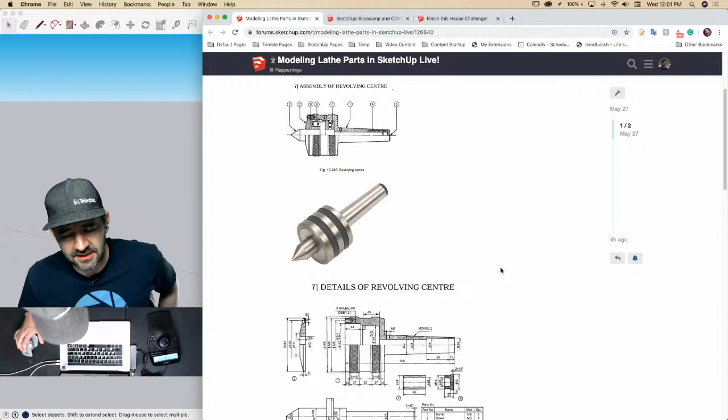As usual, I don't know that we'll have a whole lot that you guys will have to pass to me, but the images I'll be modeling from are available on our forum, forums.sketchup.com. So you can download those files and follow along. If you're watching the video, you can grab them from there. I'll try to make sure that we're linked to it. If you are going to do it live, I'll give you a couple minutes to download.

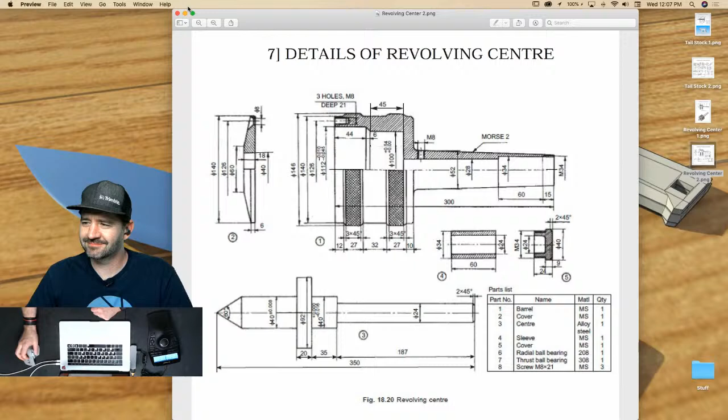This would be the perfect chance for everyone to follow along at home. Follow me as I follow me. Man, this is the best live stream ever.

Okay, so I'm going to go ahead and do that. I'm going to start a new model, and I'm going to do a couple things. I'm going to start by going to my styles, go to my watermark, and import that drawing from my desktop - that would be this guy right here.

And I'm putting the background. I'm going to position it in the lower right corner so we can both see it. I'm going to shrink it down as small as I think I can get and still see the numbers.

All right, so I'm going to do that, that's where I'll start. I'm also going to go up to Window and Model Info. I'm assuming all this is in millimeters, so I'm going to model in meters.

SketchUp is made to do architectural modeling and doesn't necessarily do the best job with sub-inch dimensions. It can maintain those geometries, but it has a hard time creating really tiny geometry. So I'm going to do everything in meters, a thousand times bigger, and then shrink it back down to scale afterwards.

So I'm going to come in here and go to units. I'm going to say decimal, meters, and I probably can get away with 2 decimal places. I'm also going to turn off length snapping.

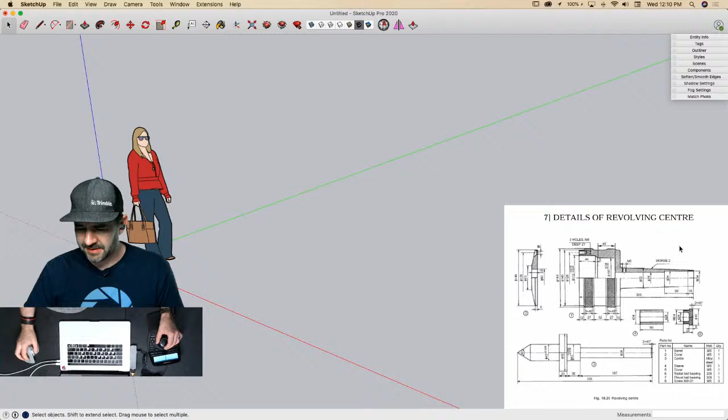So what I think I'm going to do is start with a line that's 300 long. I'm going to come right here, go 300, and that's going to set my initial scale. I'm going to remove Laura, we don't need her right now.

Okay, so if I look at this, this is saying that's the outside dimension. Those are diameters, right? I'm just wondering why this one is cut off and doesn't have that line continue, but it doesn't matter, it's the same.

So I'm going to start up at the top, and it's 112, so I can do 112 divided by 2. And then I can start drawing this geometry over here.

Dash, what's that little dash 0010 stuff? Can you figure it out? I don't know, it's too small, so I don't care. Well, there you go, perfect. Is that a bad attitude? Okay, so I'm going to go that way. It's an attitude for sure.

I'm going to go this way, 44. And then I have teenagers, so yeah, I know what an attitude is.

So down right here, I have a dimension, it's 6. I'm assuming it's 45 degrees. It's not labeled, but I'm going to go ahead and guess that. So I'm going to come down 6, go to the right 6, and just draw a line back connecting the two. That's going to give me my 45 degrees there.

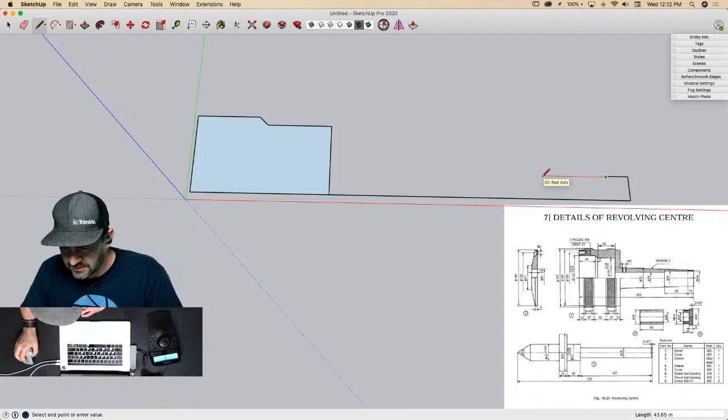That's going to come in 60. And then that's going to drop, let's see, come here, and then I could draw this up 14, half of 28. I did that math in my head, no big deal. And that's the piece that gets taken all the way over here.

All right, so that, like I said, is my cavity, that's the inside geometry. Now let's go hop up here and draw our outside.

So this is a weird one, it's 128 halves. So I'm going to go this way, I'm going to type 128 halves like that to get that dimension. And then I'll come over.

Now I'm using dimensions. What's that? It looks like 126. It may be, I think you're right. Dang it, curses, I have to hit undo.

So not only are you having to do math, but now you're also apparently having to read critically. Well, it's kind of small. So this is maybe here for reference, and I'm actually going to, yeah, so we'll go here. That's why I got a backup. That's what you guys are all here for.

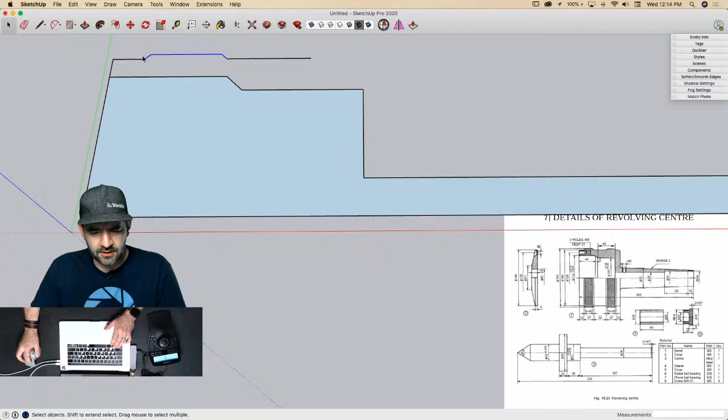Rather than draw that same dimension a second time, I'm just going to grab all of it and move it with the modifier key to copy it over to there. With that, I'm going to go this way, 10.

And now interesting stuff happens because, oh, right there - so it looks like I'm going to draw a line all the way back down like that. And I have this dimension right here, which is 52. So if I go up 52 halves, that puts me right there.

What I believe happens then is this is going to taper down to almost nothing. There's not really details of what happens there at the end, so I'm thinking maybe I'll come up 1 millimeter just to give myself some material there, and then have that angle up to there like that.

So I don't want to lose this middle line. I want to keep that, but I can get rid of this.

What's that M mean down there? The M34 thing. Maybe it means 'Middle,' explaining the middle line. Sure, sure. No, that means you should model in meters. Oh, it's a Morse taper. Dave said - you beat me to it. Of course, duh, what else would it be?

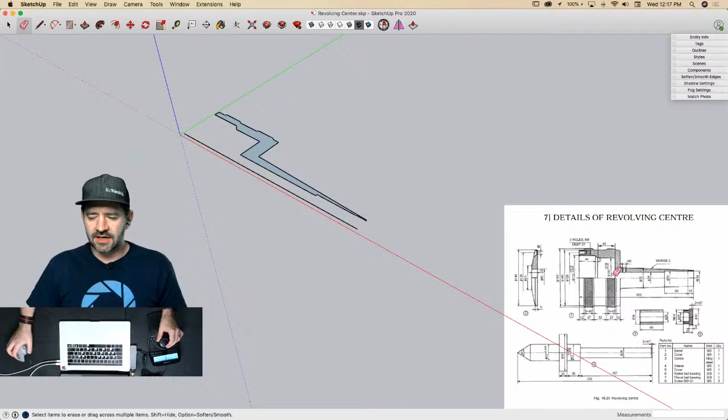All right, let's call this a revolving center. All right, looks good. Now we have to spin this around something. Since this is all the model's going to consist of, we're going to go a little bit higher poly on this. Though we do have knurling, which is going to add some geometry for sure. But rather than use a standard circle of 24, I think I'll jump up to a 48-sided circle.

I'm going to put this circle right at the end, pull it out on the green axis. I'm going to select the circle, follow me with that piece. That gets us the barrel of the revolving center.

So there's more details to add in here - I do want to come in and do some knurling, but right now I'm just going to triple click and make it a component. I'll call it as is shown - it's part 01, which is the barrel.

All right, we don't actually need this or this anymore. I'm going to move that up. Let's see what we should do next - let's do this cap down here.

Dave just offered up some completely useless information here. He said that the taper should be 1.4307 degrees from the center line, to which all I can do is laugh. Not bad to know, but okay. Sometimes you can have too much information. I'm just kidding, Dave, no offense. Please don't take offense.

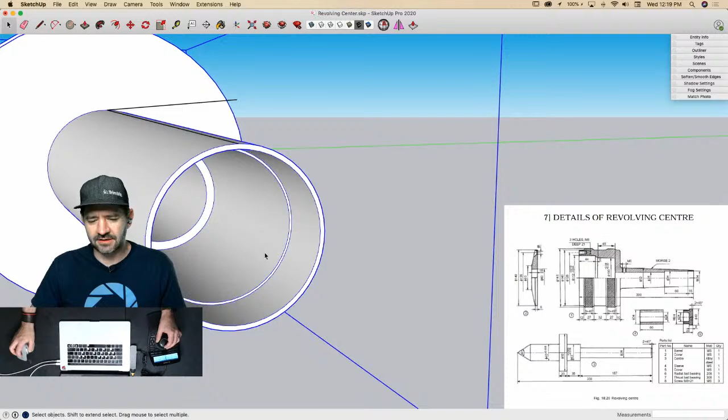All right, let's see what I got, just out of curiosity. Protractor - there we go, every once in a while. Let's see... I got 2.5. Huh. Oh, from the center line - well, that should still be... huh. Well, that's what I got.

Looks good from this side of the camera. That just gets driven into something and friction fit into a holder anyhow, right? Still works, yeah yeah yeah. Details, doing things right, whatever. Okay.

I'm going to draw this little cap right here, so the length of it is 24.

I should point out, yeah, Jody's joking around - Dave does an awesome job, he's a great teacher. I only joke with him because I know him, consider him a friend, and know he won't take offense to us joking about how he's probably right and I'm probably wrong. Everybody else, while you're working your way towards Dave's status, we'll probably be nicer to you. Probably. Oh wow, right? Sure. I thought I was paraphrasing what you said. I thought... you know what?

Actually, now that I'm drawing this, here's the thing. Hold up, so all of a sudden it matters? It might. This is where Dave sits back and goes, okay, keep modeling, we'll talk in a sec.

So that degree number he got, he looked up what a number 2 Morse taper was. Oh, okay, that was just an interesting data point.

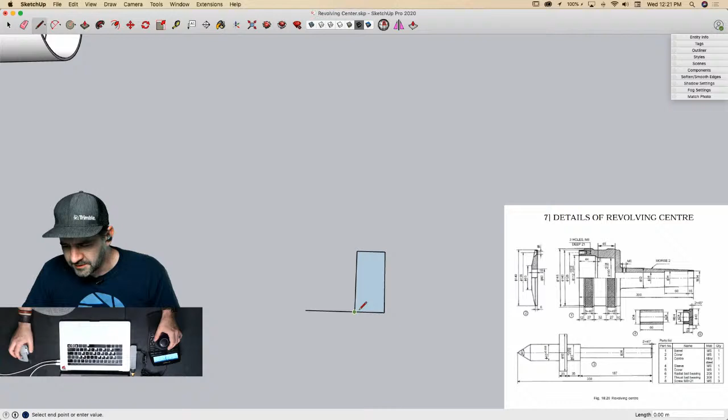Wait, I'm totally wrong though. Andy said he got 2.7 degrees in his drawing. Well, if you're wrong, at least you're wrong together. Misery loves Andy.

Alright, so I'm going to draw this thing over like this. This says it's 34, this was 40 out here. This is 34, and then I'm going to have another one, which is half of 24. I can do that math in my head — not bragging, just saying. That is what that initial geometry looks like.

There is a 2. So here I'm going to draw a line up 2, grab that line, rotate it 45 degrees, and move it.

Dave guesses you changed it to the number 2 Aaron taper. That's right, I scratched out the M's and put A's in there. Forget Morse — who's that? He was always talking in codes anyway, right? Never had him on the stream. What does he know? He never even used SketchUp. Those would be like the most boring live streams ever — just all tapping dot dot dash dash dash dot.

Alright, I'm going to hop on the red axis and pull this out. Axis, damn it — just to get away from the geometry. When I come into circle, it defaults to whatever the last circle I drew was. So I can come here, pull this out. As long as I'm on the green axis, it's going to align with my existing geometry.

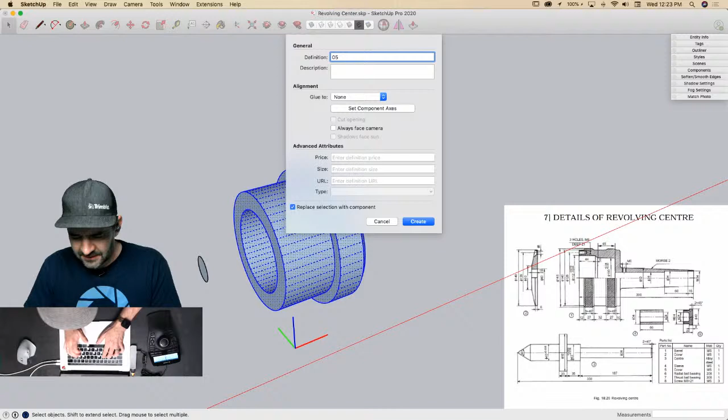Axis — someday, dude. I'm going to grab all that. That's going to be the new drinking game, every time I correct you on axis. This is definitely going to be some trash. This is going to become an interesting show. Although I'm only drinking coffee, so all that means is I'm going to have to pee more and start talking faster. That's true — be able to correct me before I even screw up.

Alright, so I want to take this. I'm going to grab it by the axis — said that one wrong on purpose, since it's no fun to correct me if I'm intentionally making mistakes. I'm going to put it right here. I'm going to grab that, drag it in here like that. See, this is what I was saying now.

If I increase the size, I come in here, grab this circle right here. Oh, it's been exploded. I'm a little confused by this part, because my revolving center for my lathe — a wood lathe — didn't... it's all solid. I'm confused what they've got going on here.

Well, let me show you. I'm going to grab this circle, Option Shift, and pull it up to here. That's going to make it the same size as this. It doesn't have the taper, which maybe is the thing — maybe that should be, but that may get me closer. That looks a lot like a Morse number 2.

Yeah, I mean, I didn't want to pat myself on the back, but that's an impressive Morse taper you've got going on there. Thanks.

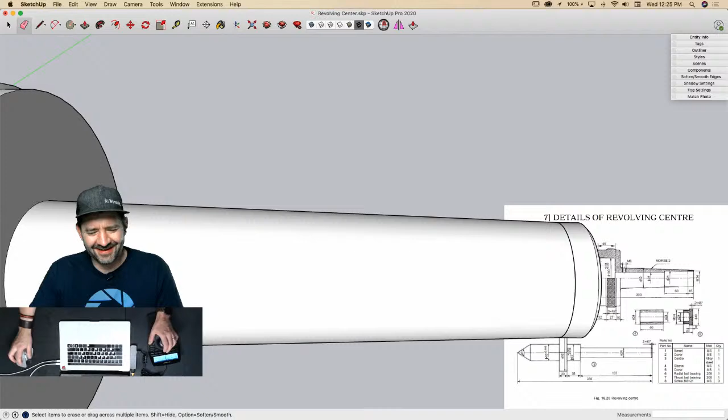Point 9, which is pretty close to 1 point whatever the other thing was. I don't even remember, you know — 1.72, something like that, I don't know, I don't remember. That's impressive. 1.4307 — yeah, that's close to .9.

I mean, it's not — you don't get to use phrases like 'thou,' which means I'm a little less impressed. I want you to be saying, oh yeah, it's accurate to 17 thou or whatever. Nah, I don't talk like that. Just saying, but you could. That's true, I could talk however I want. Well, I got to keep it PG, but other than that.

Alright, I'm going to draw this little sleeve right here. It's pretty simple — 34 diameter, so 34 divided by 2 for my radius. Then I have another circle on the inside, which is 24, so 12. Then get rid of that, then pull the whole thing out 60. That's all the sleeve is, so that one's pretty simple. I'm just going to triple click and make that into a component. The sleeve was part 4.

And then I can put that inside where it goes by grabbing it by that piece right there. I'm going to turn on X-ray, and I'm going to come align it right there. That fits perfectly. All right, 3 pieces down.

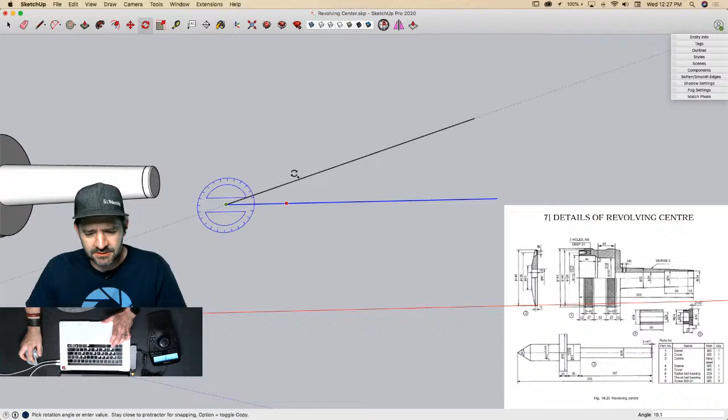So the first piece, the point is actually 60 degrees. So what I'm gonna do is grab this line, rotate a copy of it with Option, and rotate it 30 degrees. Back this way now, we'll start back here. The shaft is 24, so that's 12.

And I'm gonna come this way, 187. Then I'm gonna step up. Again, this is where I'm honest and open and vulnerable with you guys, acknowledging that I am so very, very bad at doing math in my head. But the plus for you guys is my shortcoming means I teach you tricks on how I get away without having to do math. So right here, here's how you can be lazy with your mathing.

So this shaft is 24 overall, and it goes to a larger section, which is 40 overall. Now I could do the math there, but what I would do instead is draw a line, and that gives me that full length without having to go in and figure out that it's 8.

And I'll come across 20, drop it all the way back down also. And then one last one, actually my last one I don't even have to do, because it's the same dimension as this right here. So 40 here is also 40 here. I can just take this line, pull it straight through till it crosses.

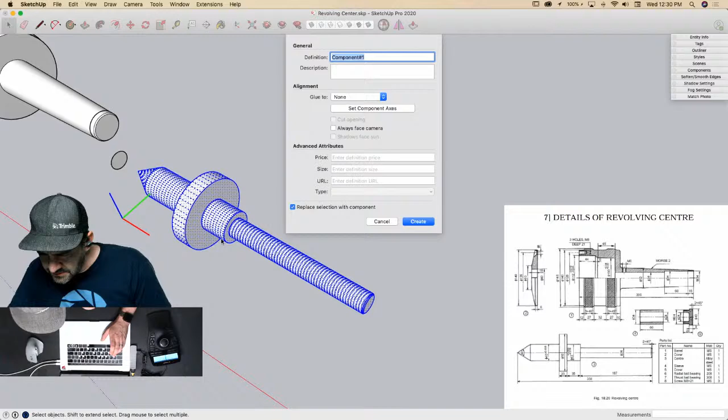Then once again, all we have to do is put another circle at one end, line to the red axes, and move it out so it doesn't connect. Axis, oh man. There we go. Triple click, make component. This is number 3, the center itself.

All right, now we got to get that in here. I'm thinking I'm gonna try grabbing it by the wider piece, because I think that's supposed to line—it's not supposed to line, it's supposed to line up in there. Where's this, what does this line up with? What am I doing? Okay, that didn't work.

So I'm gonna just put it at the top, and now I'm gonna grab it by the horizontal side, and I'm going to move along the blue axes and line it up vertically. There we go. I guess what would have made a lot of sense for all of this would have been to keep it aligned to the origin, because then I can just check as I'm modeling that everything's lining up correctly. I can turn on X-ray and see that laser line going right down the middle.

Every piece is lined up. That's probably what I should have done from the beginning. Lesson learned.

All right, I'm going to save. That's what I do. All right.

Let's get this cap on here. Cap, cover—they have a front cover and a back cover, so I had to change the name there.

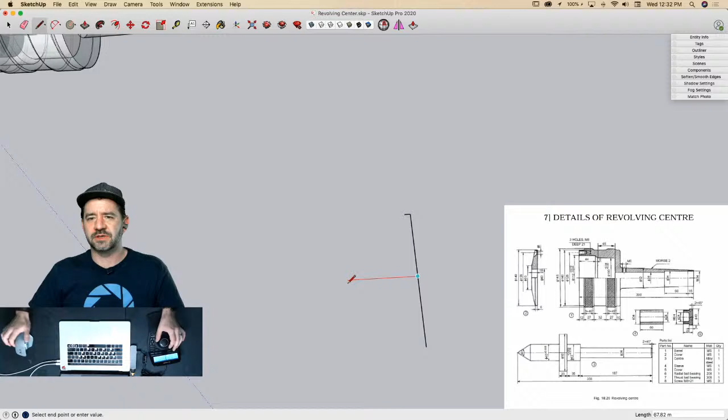Dave's wondering if I'd ever consider modeling those parts in place so you don't have to move them together. That's a great way to do it, and I actually like to model in place a lot, but I find when showing people, it can get to be a lot of lines. I've heard that from people too, like when I model off of reference imagery, I'll have a bunch of planes over each other in X-ray mode and start snapping around, and people don't really understand and get lost. So I like it, but it seems to be clearer for people watching when I don't do it.

That's the reason I'm modeling them off on the side. Plus I get to show off some super sweet relative move stuff. But yeah, if you're comfortable with it, that would be a good way to do it.

So I just finished that off with 2 dimensions. This dimension right here is 18, and then the center to this first break is 60. So I just drew that at 30 and then connected the two together.

It does have a hole in it. I'm assuming the hole is 40, which is what we got here. So to get rid of that, I would just come up 20, go straight across with that. And there we go. I'm holding onto this because this is the center of this whole thing, so I want to keep that, and I can put a circle.

That's where I'll put my circle, on the red axis. Step it out here, axis, along the green axis—I'm saying it spitefully. Okay, grab that.

Make that into a new component. I'm going to call that 02 front cover.

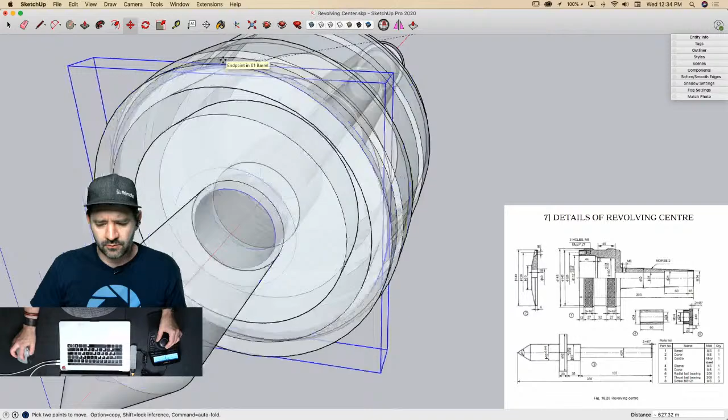Glad that's good. Why am I getting some weirdness here? All right, this is a thing that happens—you guys get this, where stuff's snapping around weird. I like to try X-ray and force it to go where I tell it to go. So now would you say that this video is X-rated? Pretend that didn't happen.

Okay, so that didn't line up. I'm wondering, I really don't even know how this is supposed to line up. Well, your disc looks bigger, your diameter looks bigger for the—that's for the what I'm wondering—piece. All right, so I lined it up to the front of the cone here, and then I'll grab it right here and drag it back. I'm just curious, so as that lines up, it is bigger.

Let's come in here, I'll double click and double check some dimensions. If I go one end to the other, it says it's supposed to be 140 out to out, which it is. So did you shrink the other one when you were messing with the scale earlier? I don't think so—when you scaled the back end? Because it says it's 140. Obviously something's not right, let's see.

Let's go here. Oh, you monster. 128.

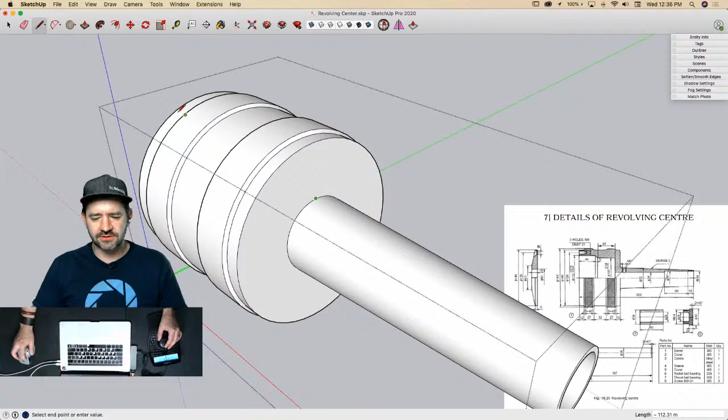Here's what I'm going to do. So what I want to do is grow this outer piece. I don't want to mess with scale on a circle, especially with this much connected geometry—stuff's going to get distorted. What I want to really keep is this profile here, these lines right here. So I'm going to drop, and then drop straight down. And then I take this surface, intersect face with model.

All right, it didn't give me that. Select all of the intersect face with selection. There we go, that's the line I want. Everything else at this point I can actually get rid of.

Oh no, I should do the same thing. No, because the insides—well, let me check my inside dimensions real quick. I know my outside dimensions are wrong. Let me check this real quick. Andy said 128 is the inner diameter. So 122... 112 is this... oh, 126 is to where the screw hole is. So that's the screw, 126 hole. Andy fell for the 128 thing too.

All right, so I'm going to get rid of this—simple mistake, I'm going to get rid of it. Got a screenshot of this. And then I'm going to get rid of the... oh dear, golly.

Gosh darn it. Wow, that's real nice work, Dave. All right, there we go. Nice, so that's what I want.

Ew, man, I tab away for one second and what's going on over here? Nothing, I'm triple clicking these lines and then deleting them. Jeez.

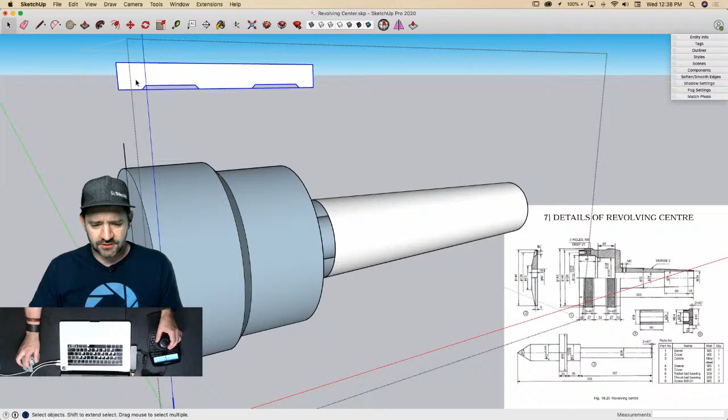So what I'm going to do, again, I'm trying to make sure I keep this as correct as possible. I'm going to take this - I don't think it's a circle, it's not a circle. I'm going to weld this real quick, and grab it and say follow me with this shape. Oops, follow me with this shape. What? Oh, it's grouped. I can explode that now. And group, grab this, follow me with this. Now I made that inverted.

But it still is going to work. So I'm going to grab all this now, reverse the face.

There we go. This doesn't feel educational anymore to me. I'm sorry, it's like I had to figure out how to get out of that pit of self-loathing, not sure what this feels like.

All right, so yeah, that's what I could have gone through to fix it. Honestly, being that it took maybe 10 minutes to do that whole barrel, it probably would have made more sense to just go through and redraw it. I was excited about the opportunity of taking that outside piece and moving it up, but having done it, that was something. That was something.

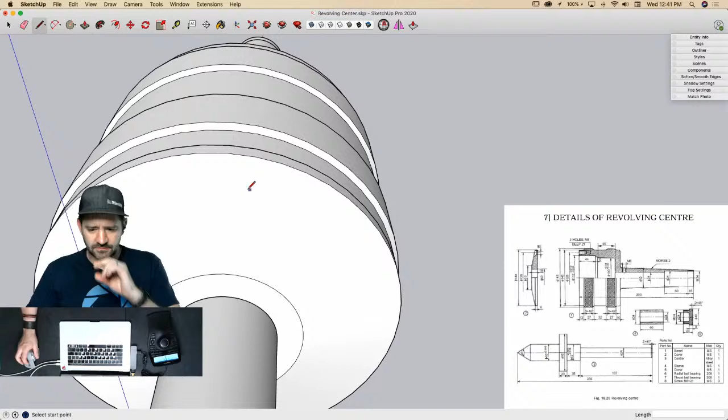So here's what I'm going to do, here's what I'm thinking. I'm going to hide this piece. I want to use solid tools to do this. I'm going to draw this circle on the top - this is going to repeat 3 times. So I'm going to come in here, put a circle right at the middle point, and bring it up 4. That's going to give me a circle that is 8.

I'm going to take that and push it in. This goes in, it says 21 deep. So I'm going to pull it this way, 21, turn on my x-ray - that's what that looks like. I'm also going to push-pull that out this way, kind of indiscriminately long. I just want it to come out a long ways.

Now I'm going to go to my outliner and turn my front cover back on. Now what I want to do - see here I have like kind of a flare, so I have a countersink there. What I'm going to do is push this back in, so I go into the geometry.

Don't have specifics. Christoph said here you did 12, not 21. I got the numbers right, yeah, just in the wrong order. Well, how specific are we going to get with this machine?

Jeez, it's not like he's going to be spinning at a high rate of speed, metal flying after if you do something wrong. I will take that and extend it 9 longer. Everybody happy? Sorry, did you just math the difference between 12 and 21 just like that? Yeah, when I get angry, I get good at math. All right.

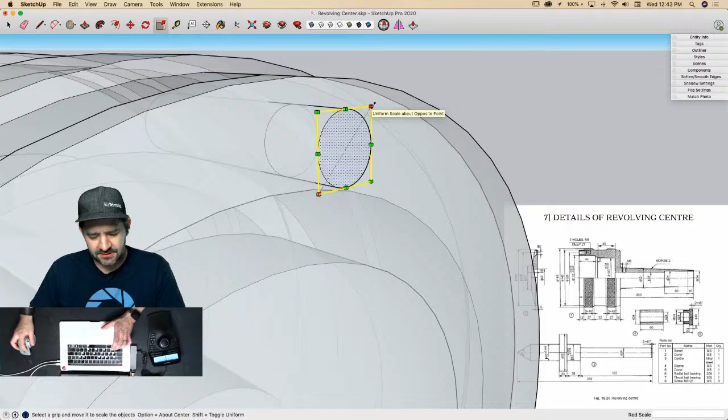I get up to 17 thou. Sorry, I'll shut up. I'm going to scale that off of the center. Option, no, I'm going to grab a corner, excuse me. Option to pull it in the center. Pull that in big like that. That's going to give me kind of my countersink there.

Let's take a look at that. How's that going to intersect? So I can push that back in a little bit more. That's going to actually broaden the cone like that because I'm only pushing the face in. So as that big circle gets closer to the small circle, it's going to push the cone out.

When I'm done, I'm going to triple click this and make it into a group. I'm going to take that group and rotate it around the center pin. I'll start straight up, option, and bring it—these are just numbers I know. There are 3 of them, so I'm going to go 120 degrees, 2x. That's going to give me those 3 pieces.

Now, what I can do is at each one of these, I can come grab this pin. Let's save. I'm going to go to Tool Palettes and turn on Solid Tools, and I'm going to say trim. Oops, it's not solid for some reason.

Hold on, let's check Solid Inspector real quick. Oh, I think I left an internal face in each of these. Oh no, all fixed, good. I left an internal face in those where I pulled the second piece out to create the cap. Let's see if this looks good in X-ray, we'll see.

I'm going to take this piece and trim, not subtract, from this piece. That's going to be that first cut. Now I don't really care about this piece, this isn't the actual screw, it's just representative. So on the second piece, rather than trimming, I'll select it and subtract from the barrel. And when I'm done, I get that.

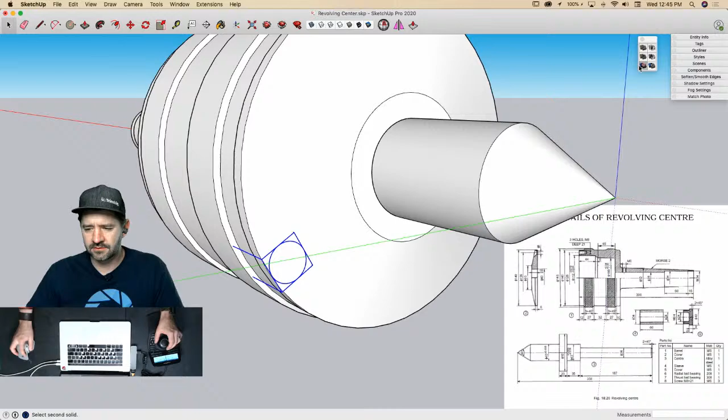Look at that. If only it was that easy to do in real life—basically, why don't you just do it, machinist? All right, trim from the cap, then subtract from the barrel. Trim from the cap, subtract from the barrel. Boom, those pieces are done.

That was pretty good. Let's talk about knurling. So knurling is—it's basically a term for making your model extremely heavy in very little time. That's what it actually means. What can I do to bog your computer down? I know, crisscross patterns.

So obviously the idea behind knurling is getting what's otherwise a smooth piece of metal some tooth, so it's easy to manipulate by hand.

So what we're going to do is come in here. I'm going to take one piece, this piece right here. I don't want to go in and draw a whole bunch of knurling, of course—I want to save my efforts wherever possible. My thought is to come in and just knurl up this little piece and then copy it around. So I'm going to try to do that.

I think what I'll do—I haven't done this a whole lot before. Let's see if we notice. Yeah, so I'm going to go to the midpoint like this. I'll do the same thing coming this way. I'm just trying to decide how much knurl I want to add here. I'm just going midpoint to midpoint, right? Midpoint to midpoint.

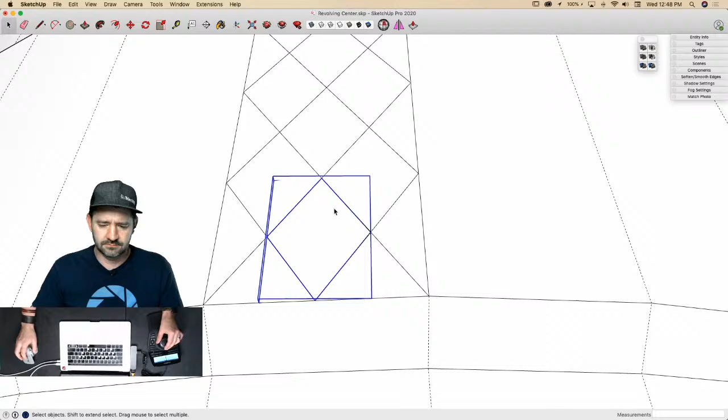You know what I would love to see? It's not possible, but if you could just grab all the lines and push them down, and SketchUp would auto-fold every one of those into a nice, useful knurl. Alas. All right, I'm gonna grab—I'm putting a little too much on the auto fold functionality. Yeah, that's asking a lot right there.

But that's probably a SketchUp extension opportunity. Yeah, somebody out there looking at you, developers.

All right, so I'm going to realign my axes so it's at the face. One of the problems I have right now is, because I took my circle along the green axes when I pulled it out, that means I don't have a surface that's flat to my world at that point. So by realigning the axes right here, it's going to make it easy to grab the axis center point and pull it straight up on the blue. All right, so there is a single knurl.

I'm going to grab that. So Interoth said right-click, align axes. And also, that would work.

Knurling isn't those bits getting raised up, it's the lines getting pushed down. It's a removal. I mean, we basically just made this thing a larger diameter than the drawing said.

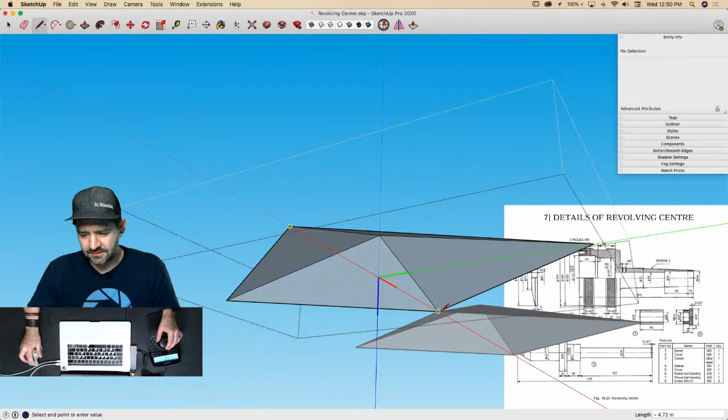You know, I could - I don't even need an excuse, I can just do that. I don't care. I'm going to chop off half my knurl here. It's only a partial knurl now. Semi-knurl, that's right. Take this.

Copy them over here. Because what I could do so good right now is looking pretty sweet. The issue that comes up right now is this. So if I take - but I liked your thinking.

So I think I'm going to make - I've just challenged my own idea of what knurling even is. Oh, Mark had a good idea.

You could just take all this and flip it over. Thanks, Mark, thanks for totally ruining - oh, did he steal your thunder? No, totally kidding, Mark, that's exactly where it's going.

That's great, good thinking. I'm going to take all these pieces and group them together. Whoops, I grabbed too much. I have taken too much.

All right, so I'm going to do a group select like that. I'm going to right click and use Select Only, which is part of Selection Toys by ThomThom, and say select only components. That's going to deselect everything that's not one of these highlighted components. Then I'm going to make those into a group.

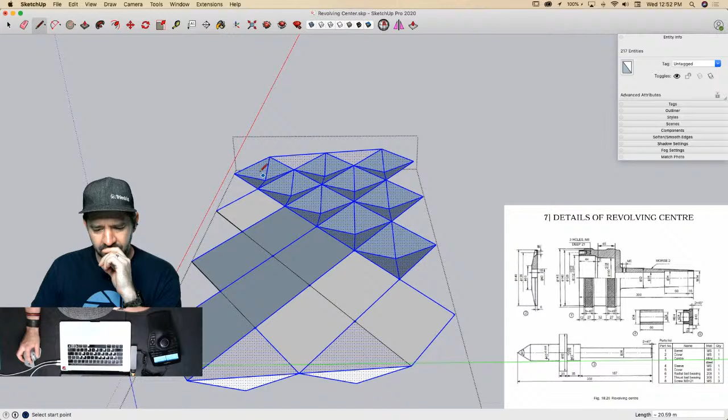Will it consider this all solid? I don't know. I mean, it goes down to zero thickness at every one of the intersections there, right? Let's see, if I grab this.

Also, that first one's not closing right. You've got thick lines in the middle of your... I think if I do this, yeah, it's going to delete it all. Okay. That's okay, it's not a big deal.

I was just wondering if I could use solid tools. I don't think I can. Yeah, this is going to be an issue because exactly what Jody was just saying - all of my sides are coincident with other edges, so I don't have a spot where it's real simple interior or exterior. Everything overlaps.

So what I think I'm going to do - the only reason this isn't as straightforward and simple is the way that this piece meets with this piece, right? Because that's not going to be simple at all. Here's what I'm going to do.

I know at this point we've gotten kind of - what are we doing right now? We're doing like a mental exercise. Or thought experiment. Thought experiment. There we go, that's the words I was looking for.

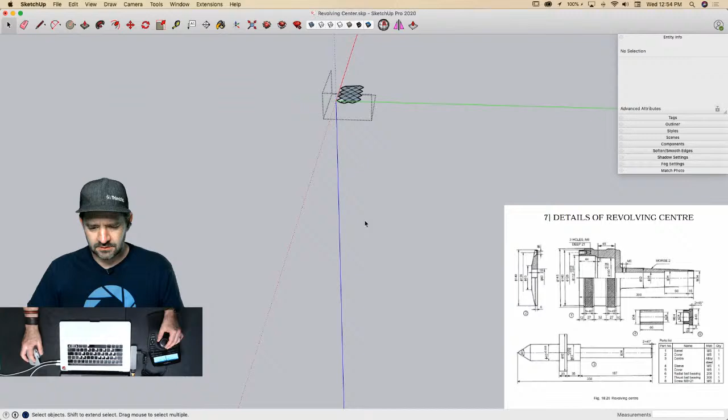So if I grab all this, I'm putting it in a group just for one reason only. Oops. And that is so I can come in here and not see all that other stuff.

All right, so I'm going to get rid of these lines I used to create my diamonds. All right, so now I have just that solid piece.

All right, so now I have this piece, which is my downward facing diamonds, and I have this piece. So I have these two groups. I'm going to group them together again, so I can come in here, simplify my drawing, and see everything else. Now what I'm going to do is take both of these and explode them.

Now if I come in here and start deleting stuff, like these faces here, that's most of it. Right here, because of the angle, each wedge is going to be at a different angle, so each piece is actually cut a little bit short to make those pieces come in together.

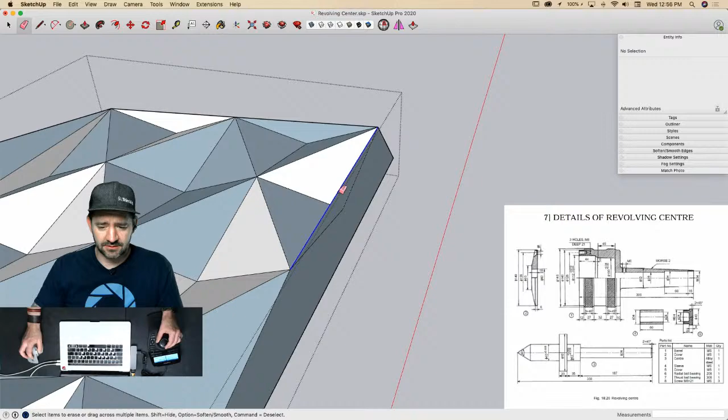So that's how I respond to Jody's challenge, basically, I guess, is what just happened. Nice, I feel like you just slapped me across the face with a glove, with a gauntlet. Was it a glove full of knowledge? It was, in fact. That's actually the term knurling, a Swedish term that means slapped with a glove full of knowledge. So some people don't know that. The Germans and the Swedes, they really mapped it all out for us.

They had it figured. All right, this is almost there, almost but not quite. The issue I have right now, of course, is this. The knurl just kind of reverse faces. Oh yeah, I should probably orient faces too. Do that, please. I got an issue, wait a minute.

That is an anti-knurl. Yeah, but it's okay, we made an anti-knurl. So I'm going to take these two faces. No, I'll do one at a time. Take this face right here, rotate it 180 degrees.

Oh, what happened there? Oh, because I'm not flat. So I'm going to take Ennerot's idea, take this and say align axes to this face. Then I can take axis... wait, axes? I aligned all the axes. Yeah, multiples. So I said that right for the first time.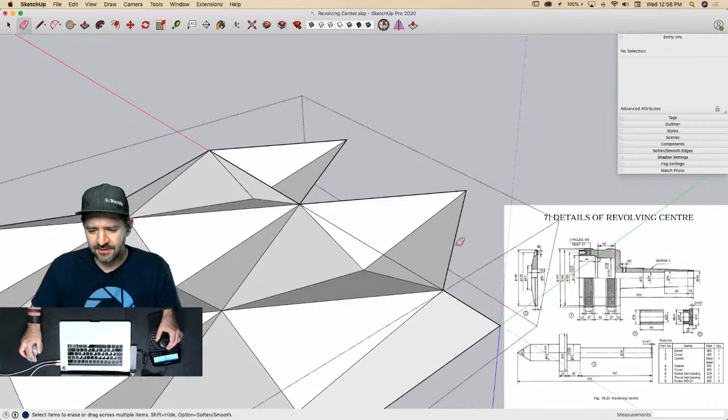I'm going to grab those two also and flip them around 180 degrees, and then one last group select, intersect faces with selection. That cuts it all, everything's cut for my anti-knurl. And come in here, get rid of these pieces on the end, this piece, see it coming in there. So if we wanted a true knurl cutting down, we could have designed the opposite of a regular knurl. It still works, it's still good.

We're good. All right, I'm going to double click this line right here, or this face right here, and hit delete. That's going to open the whole thing up. I'll just get prepped right here and do the same thing, delete there. Then I can take, what is this line doing? Get lost, pal.

Google cannot provide an antonym for the word knurl for me to use in this scenario. And I'm sad. What's knurl spelled backwards? That's what I would do. Oh yeah, there you go.

Actually, before I copy this over, I'm going to get rid of this geometry on the sides because I don't actually want that piece underneath there. So I'm going to come back in here. Awesome, I'm going to grab both of these now.

I'm going to rotate, unhide everything so I can use that tip to rotate by. I'm going to rotate it, not a specific amount of degrees, but from one point, option to the next, and then tell it to do that 47 times, which will take that all the way around. Do it a bunch of times.

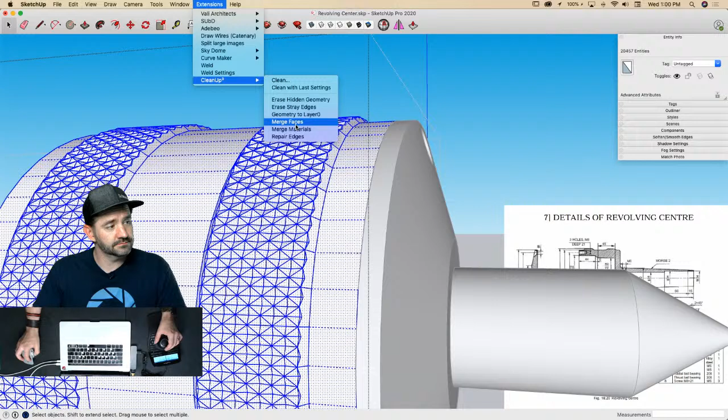The last thing I'm going to do is grab all of it, and rather than manually deleting this, I'm just going to go to my extensions and use cleanup to merge faces. Wait, let's get a polygon count. Oh yeah, there's a couple. I should have looked at it beforehand, but yeah, there's... I know, that's what I meant to do. Undo, control Z, control Z.

That's a heavy little piece. That's not terrible, but it's not little. I've seen worse, I've made worse. Yes, you. I mean, really? Oh yeah, there we go.

So there's our anti-knurled. That's got to be a thing, right? I've seen that pattern as a knurling. I think you can do it. I think it really depends on the bit you're using for making your knurl, so I think it can go both ways.

When Dave did it, I'd be interested to see. I'm sure Dave will post his on the forum. He doesn't like to one up me. He likes to let me do mine, and then he goes, 'Oh, that's cute, let me show you something.' Well, he did post a screenshot, but you can't really see his knurling in it. That's because his knurling is fine, super fine knurls. See how it looks? It's just like a gray field there, because he's got super fine knurls. Andy's posted a screenshot of his stuff too, but he's been a little quiet here. I think he's off sneaking around trying to make his own knurling right now. Well, that's because his only comment is, 'I did all the dimensions correctly.'

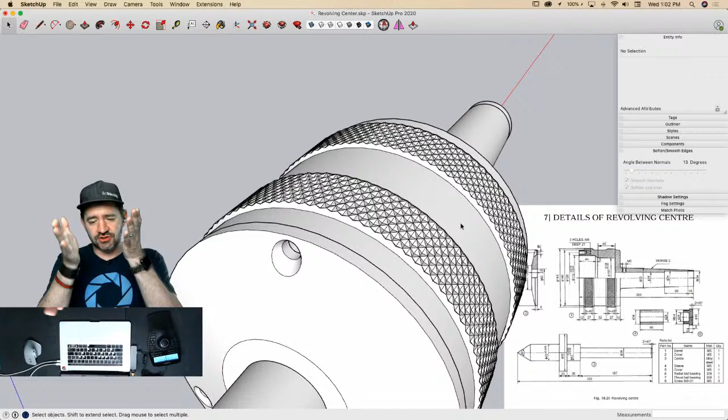So Brian's questioning the 47 you used to make it work out. That's because you had one already on there, and then you need 47 more. Right, for your 48, I wanted 47 copies in total. So my circle is 48 sides, so the chunk I made was 1/48. Making one copy, I'm saying I want a total of 47 copies. That's what's 47x. If I had done 48x, it would have put another copy over the original, and I would have had extra.

Awesome, well I'm going to save that. That looks nice. And yeah, that's done. All right, let's move along to a much bigger- oh no, nah, I'm not going to mess with it. Save, done, found it. Stick a fork in it. All right, or stick an M8 screw. Is that M as in Morse? Yeah, I know about that.

All right, I'm going to come get my reference imaging. Actually, I think for this I'm going to snip out smaller images because there's a lot more to this one than there was. So this is the tailstock, this is what we're actually shooting for right here. There's lots of pieces. The big piece, of course, is going to be the body, so I'll start with that and get that modeled up. And then the rest of these pieces actually kind of look like a lot of primitive shapes, so that won't be too difficult. The tailstock, though, you'll see when we look at the two different dimensions - this image, by the way, I don't know what this is, SolidWorks or something, is not actually what we have plans for. This place I'm getting these drawings from, the picture you see doesn't always line up with the dimensions. Yeah, this is what we're actually going to build off of. Oh my gosh, yeah, there's so much data. I'm going to start with just this piece right here, because this is the part that I really want to model first.

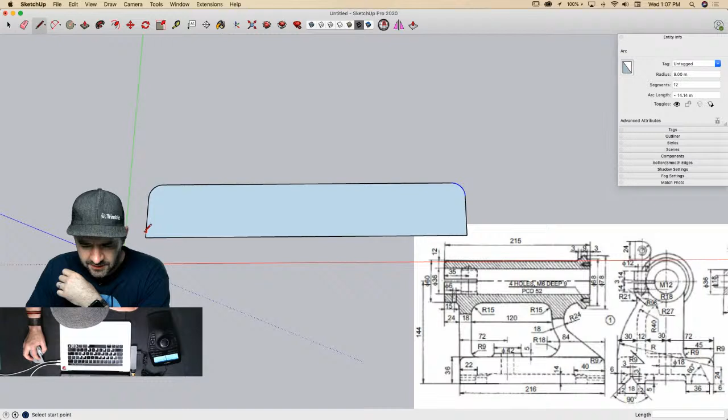So I'll draw a line from the bottom here, draw it up 144. That's the center of the barrel here. And then this part right here is 60, so I'm actually going to draw this over 24, then come down 30.

And then there, so that's that. And then I could come up here another 30 and draw that back this way, 215.

Drop that down 60. So that's the barrel, I'm not really too concerned about that. That'll of course be a round extrusion that we'll tack on later, so I'm not too worried about it. I do want to get the base geometry mapped out first.

Because I think what's going to end up happening is I'm going to have a chunk that is that cast base piece that I will intersect and union with the circle piece. I think something like that will happen, but we'll see. This is just a placeholder for right now.

All right, so this is here, and then it looks like this is 18. I'm not doing my circles or anything like that yet, that's just this right here. Then I go this way 120.

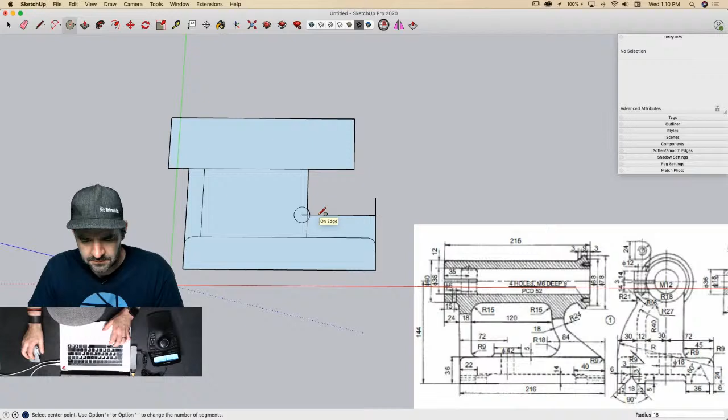And I can take that circle, and looks like I can drop that straight down here. Yikes. Like that. And that gives me this right here.

Comes to there, and then I got a radius of 24, 18. We can do this. I'm not worried, I'm not scared. We got this. All right.

Over here, I'm going to draw a circle, 24 for the radius. I'm going to take that.

Really quiet in chat, I think you might have intimidated everyone. Oh come on, guys, I have no idea what I'm doing. If you leave me, I'm really screwed.

All right, I'm going to take this. Now, this is 18, so I'm going to take this circle right here. I'm going to offset it. Oops. 18.

And then this should... this is going to get messy up here, but I'll fix it. What should happen now is this piece should kiss that piece.

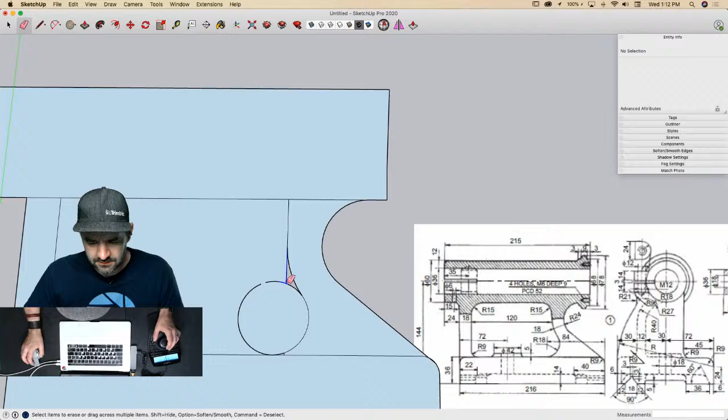I mean, it's not like I have self-doubt, but a lot of people are watching right now. It makes me self-conscious. Whoops. Then I do silly stuff like that. See, I can't even say silly, I said stilly.

All right. Not too bad, that's not a bad lineup.

Kind of looks like a sewing machine. Maybe that's what we should do next week. Let's get through this week, okay? So...

All right, so I'm going to put some more arcs in here. I'm doing these arbitrarily, I just want to get tangent arcs there. Oops, there. And there, and then I can go back and select them and bump that.

This one is 15. This one also 15, looks pretty good. And this one down here would be 9. All right, 9.

Which, of course, is the German word for no. All right.

Right about now, I'm wishing that I ate before this started. I'm going to make that topical and all about you. It is all about me.

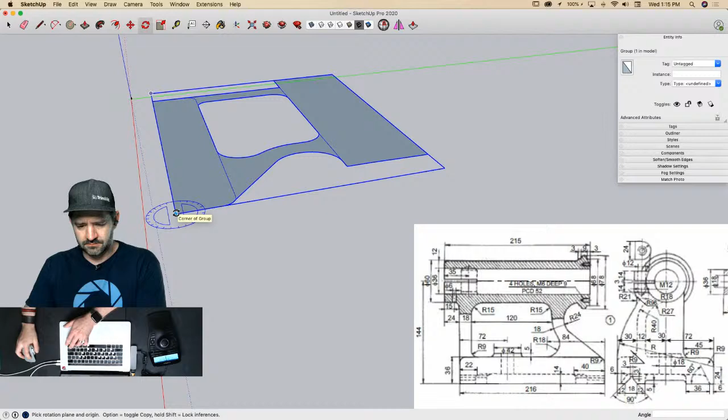So it looks like, let's take this one. We'll rotate this vertical because it is. I think what I'll do is start by separating that from this, make this a separate piece. So if I start this way and come this way, 72, and then come this way, another 72. All right, so one thing is I've got this all rounded by 9 all the way around.

Oop. Get rid of this.

So I need to take that same round off the other side. I'm going to put an arc right here, put the same one over here, and then I can just select it, change it to 9. Same thing over here, grab this one, which I was really close, look at that. Okay, excited for myself. All right, I'm gonna grab this.

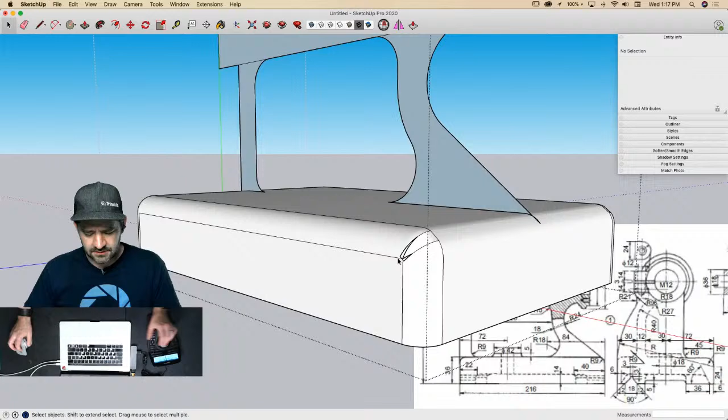And I will, some got ugly. That's neat. Oh, this is, yeah, okay. I gotta undo a couple times, because this, for whatever reason—oh, that's what happened. Look, when I pulled, yeah, that was not well done.

You were all getting cocky. I was. It's probably a lesson about humility. I don't know, something like that.

All right, so I'm gonna grab that line. I should have actually put it here. And then continue that along like that. Now if I come out here and pull this out, that's why that one face was white while everything else was gray—because I didn't do that correctly. All right, now I can get rid of, hey, I'm just showing some what-not-to-do's here.

You were really good at showing people what not to do. Apparently I really would like to be better at showing them how to do it right in the first place, but I'm a work in progress. All right, aren't we all?

There we go, follow me. See, does that look better? Nice, better, but not. Nope. What? What are you doing? That should be fine. Why are you being like that?

I don't know, did the first curve just great. Yeah, it's the same curve. Same curve. Take that. Ah, what the crap? Is that happening over here?

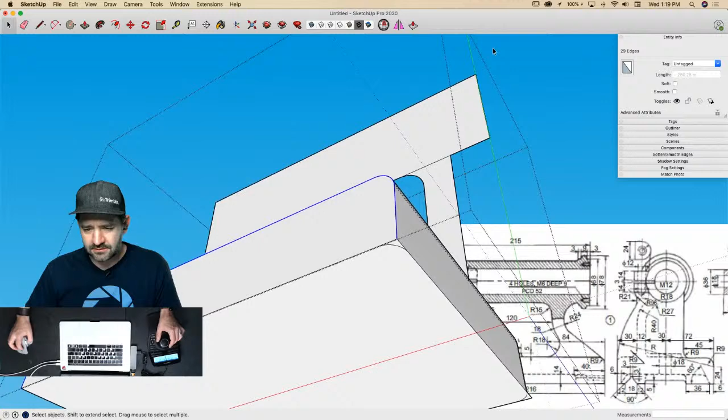Monsters, okay. Nerman said split and mirror. I mean, you know, why make it 2 times and risk screwing it up when you can make it 1 time and then remove that chance?

Okay, so I did something wrong on the other side. Obviously, the way I broke this is... before you chomped this thing with the follow me, it looks like there was kind of a little hump in that curve, but it looks fine now, so I don't know. I pulled the same exact profile, so the only thing I can think of is this curve.

You're off by 2 thou. Oh man, so glad we got in that term. Actually, I don't even know how many thou off you are. I don't know, that's math.

Oh, but that still is causing a problem. I thought I had my circles, I thought my arc up there was at 9 also, but apparently I'm just not. Okay, anyhow, doesn't matter. Not going to investigate it, just going to clean it up and keep modeling.

Which is one of those things that, like I said before, I'm working on. Just draw the stupid thing, stop figuring out what you did wrong. We all know you did it wrong. Got that part covered, the wrongness is covered.

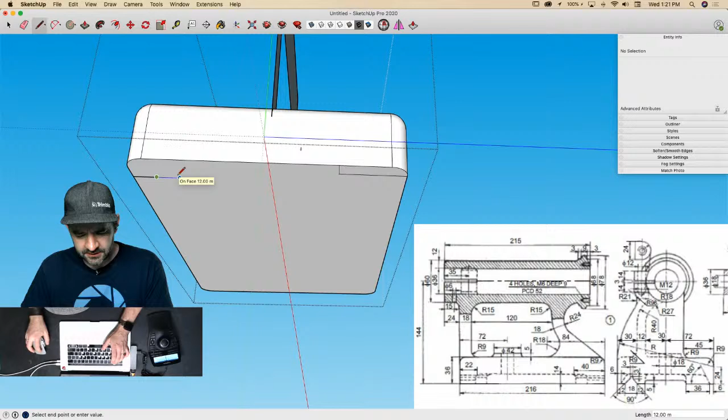There we go. All right, let me open up the super zoomed in version. Oh God, no, I don't want to look at this. There's too many numbers here.

All right, so I'm going to bring a line. This is up 5, so I'm going to come over 5 and draw an arc from here to here. And then same thing here, just draw a line over 5. Arc... arc from here to here. There is some other detail on the bottom there, but I'm not going to do that right this second.

All right, so let's get into this thing. I feel like what's going on here... it's kind of hard to see exactly what's happening, but we'll start at the very least with this full profile. We'll create this whole thing right here onto this right here.

So if I was to bring this all the way over, probably once again I could have saved myself a little bit of pain by doing this before I rounded my corners off. Well, that wouldn't hurt.

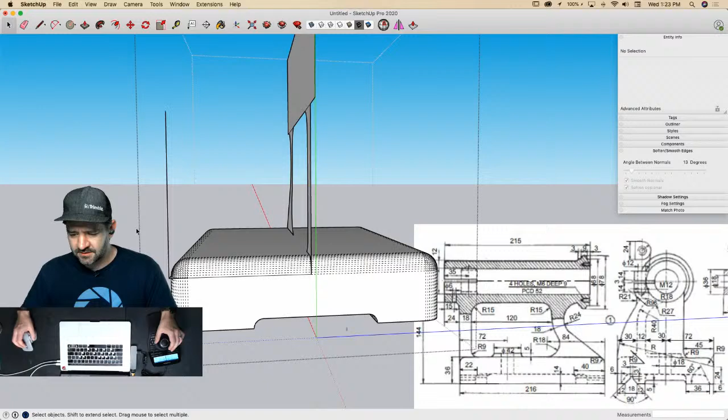All right, so I'm just going to draw a vertical reference line that jumps the corner there. The nice thing is I always do these in the wrong order, so seeing someone else do it is self-affirming - I feel a little better about myself, and it's nice to see other people's workarounds. Hey, just think if you used guides. I mean, that'd be kind of... let's not get silly. All right.

So there's this term that I like, it's called designer's choice. It's what happens when the dimension's not there and I get to do whatever I want. Not saying that's where we're at yet, but we may get there. You're in a very lucky position right now. Yeah, I'm lucky.

All right, so I'm going to draw a 2D, just kind of a... there we go. That's that knocked off corner if it were still there. That way I can draw in plane right here.

So I wonder if I'm alone in every time I hear someone say 2D, I always think of the Facts of Life. Wait, Facts of Life? Yeah, Facts of Life. Tootie? Yeah, shame of a name to have for a kid, I'll tell you that. I have to hope that was a nickname. Wonder how she got that nickname.

Hmm, all right, I'm going to pull that down. That's the 45, so that's this line right here. That's the one line I am now 100% sure is perfect. Maybe, we'll see what happens. This is still the center right here.

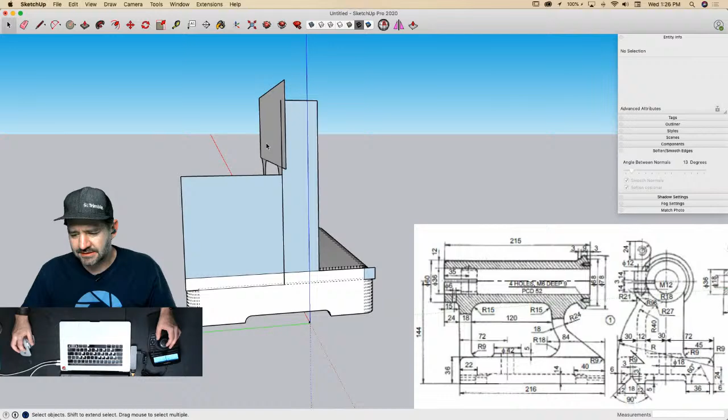Oh, actually, nope, I do have it. Never mind, I lied, check this out. All right, so this line right here - if I come up 24, that's where it is. So if I just draw a line up 24, and I'm going to leave a line right here for reference.

Andy pointed out that you could always trace over the drawing, scale it up, and trace it and figure it out that way. Or I could grab an arc, come this way, and go from here... we'll just run it all the way through. Oh yeah, yeah, because they have that dimension there, and then they just have that arc. So that goes up like that.

That was something. I mean, I have to figure they probably, realistically, what I would expect from this part is that it was machined one time, and then a mold was made, and it was drop forged forevermore after that. Something like that makes a lot of sense. Or cast. Because I would not want to have to try and do that arc every time I made one of these if I was the guy at the manufacturing plant.

I think that when you see parts like this, like the pieces on a lathe, I'm pretty sure they're almost always cast. Like it's not a chunk of material that's hand cut each time or anything like that. So I think that's a valid thought. All right, so that gave me this.

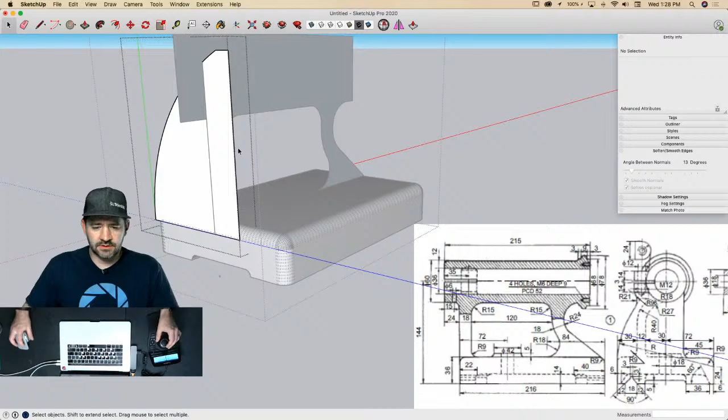So I'm going to go ahead and group that. If I come into that group, I could pull that through to here. If I come into this group, we pull that through to here, along with that. Pull this side out to where it meets this side. Pull this to where it meets this side.

Okay, I'm going to make those separate pieces real quick. Group that. Get rid of X-ray, get rid of my extra lines.

I will have, I guess we got a finishing point then, huh? We have defined what finished is. Nice. Yeah, there you go. That's an hour from now.

All right, so I'm going to clean this up as much as possible because as I intersect, I want as few lines as possible. I don't know if this is going to work. We're doing weird stuff right now.

All right, so I'm going to explode those two out. So what I've created is 3 profiles, 1, 2, 3. And now we're going to just start colliding them together. This is one of my favorite operations to do in SketchUp, I'll be honest.

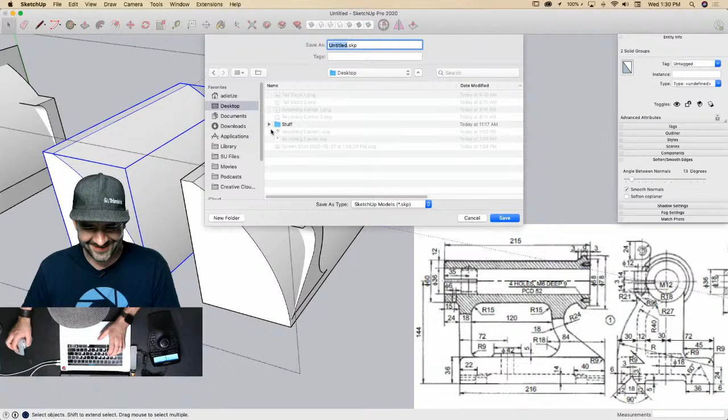Can't, whose job was that? How did we get to this point without a single save? Oh, because we were talking about different languages and there's all kinds of stuff happening there.

Okay, so what I'm going to do now is check for solid, make sure we're solid, solid, solid. Okay, as a rock. Like a rock. All right, I'm going to go to my tool palettes, turn on my solid tools.

And now we will say, give me the different intersect. I can never remember the names of these two. Boom. Oh, look at that.

Let's try it again, see if lightning strikes twice. I mean, lightning does strike twice. It's about whether it does in the same place. Yeah. Yeah.

All right, and now, oops, you know what? I'm going to leave that there because I want to use it as a reference to pull this back over, and then pull this.

Dave came back and said that they would do a sand cast when they were making one of these things before they molded it. They usually would do it out of wood. And it occurs to me you could also very easily just make these pieces and glue them together before you cast them.

If you're trying to make one of these at home, anybody trying to make one of these at home, just remember that. Just call Jody. He apparently has it all worked out. Well, I'm extrapolating my thoughts from Dave's working it out. Dave's got it worked. Call Dave. Dave's got it, don't even worry about it.

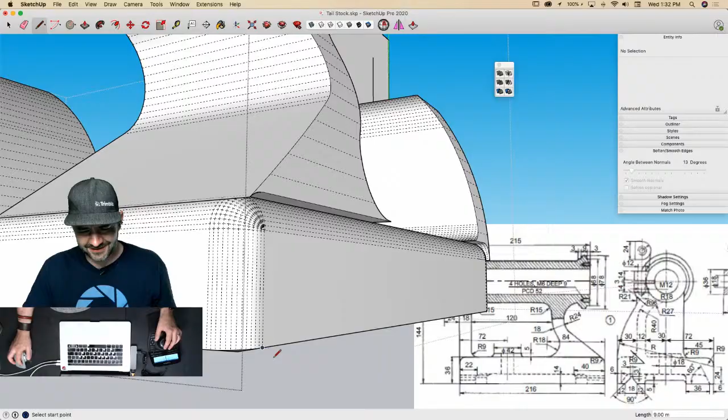So if I go this way 9, go this way 9. No, it's not going to be easier because... forget it, I'm not going to use follow me.

Do a little brute force. We're going to have this thing.

Have you stitched anything today? Because this could be your chance. This could be it. Big day, big day.

All right, so I'll get rid of that. Thinking kind of anti-stitching here. Just come down there like that.

Get rid of that. Just trying to isolate the geometry from the edge because that's real easy to just double click and erase. Like that.

Andy said delete all except the base and just pull it back up. Yeah, but I just merged. Oh no, these are separate. Oh, hey, watch this.

Where'd it go? It's hidden. Oh, that's wrong, it's because selected. There we go.

Because I can separately toggle on hidden geometry versus objects, which is becoming one of my favorite parts of 2020. If you don't know, that's new functionality in 2020.1. You can actually separate the geometry, there we go.

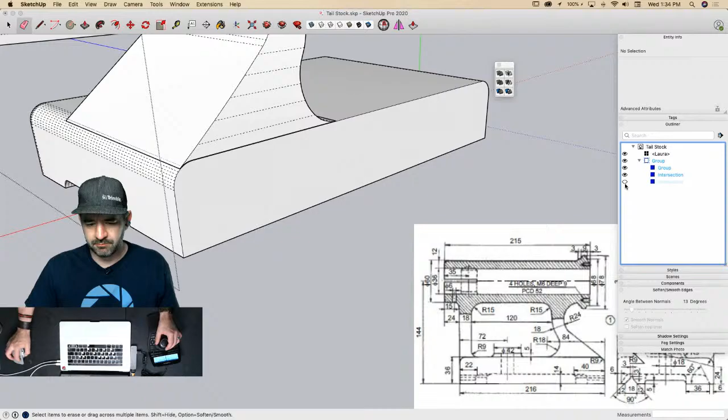Huh, just inside. That's curious, I wonder what that is. Oh. Oh.

We'll fix that in post. I'll just slide it over. I don't... this is. Move it. Oh, that's interesting. Huh, how about that? I wonder who drew that profile. Okay, amateurs, I'm sure.

Something is becoming very apparent to me right now, and that is that I did not keep that top section where it comes together and ties in. So what I'm thinking I'll do here is bring this over here.

Come in here. Can take this out of here. All right, now I have a mass to work from as I intersect into my cylinder.

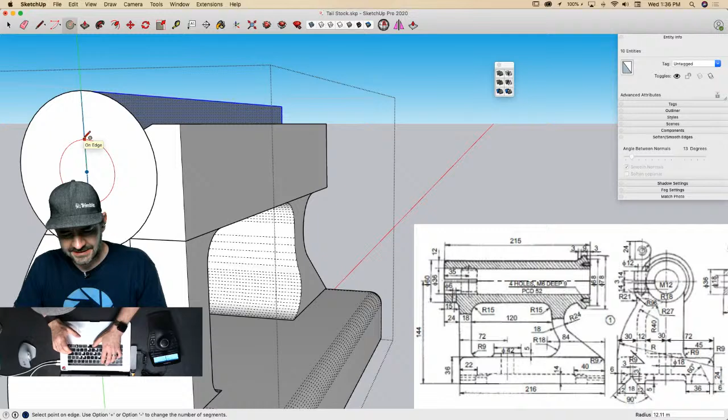All right, so I'll start at the center because I know I centered this up. And just verify some dimensions. 60? Yes. All right, and then we'll come up 36 halves.

That pretty much, I mean, that is a majority of this thing is that piece right there. That's good, that's nice, I like it. But it does have some things going on at the back here. It also, right here, 35 back, has this section where it's split. So you can see it splits right here.

Let's get that split in there. Just going to go to the corner part. Have a dimension of the split. Looks like it's 3. Then that little pop out part is 14 tall.

Okay, so I'm going to come right here. Oops, that was not where I thought it was. Man, yeah, I want that to line up with, you know. There we go. Sorry, thanks, everything's cool. I'm going to come vertically.

It's kind of freaking out a minute. 1.5, don't worry, we're good. Like that, drop down 1.5. Like that, there we go.

That's going to break our face. Sounds so violent. And that's going to get pushed in this dimension, which is whatever I say it is. Looks like it goes just a few meters past the inside of this leg. So we'll do that. We'll come to, this is what? This is 42, so we'll say it's 50.

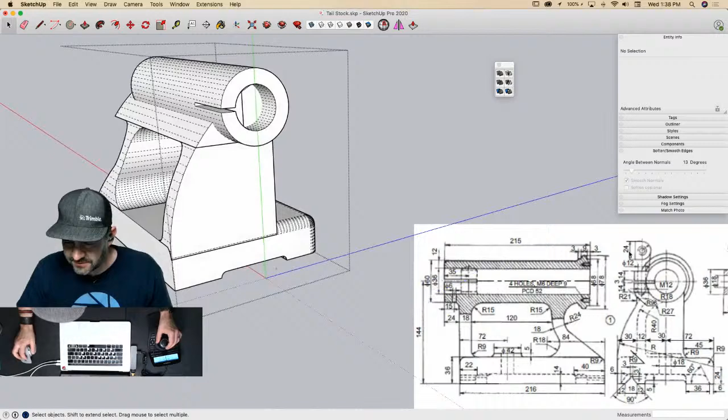Awesome. Now these little lips that stick out here, they're 35 back. I think I'm just going to draw one of these on the ground and then merge it in with the geometry. So it's 24. Wait, what are we mathing right now?

I'm drawing, so this is crazy, the way this is detailed. They have little screw holes on the outside of this to clamp together, and the way it's drawn, I feel like I have the reverse detail of it right here. So it looks like it's pretty simple, so it's just this. And unfortunately, the drawing, that actually isn't even the same drawing anyway, doesn't show that side.

That's like the secret, we don't talk about that. Yeah. Yeah, so you get this part, then you get this part, and then la-di-da-di-da, and we're good to go. You get it, you get the point. You get the point, yeah. Just do it, etc., etc., etc.

And I don't have a dimension here, so no, we'll just put a 6 millimeter hole there. And then that is 14. All right, I'm going to temporarily make that into a group.

I'm going to grab it by the middle because the dimension I have for where this is horizontally is 35 from the front. So I'm going to start by putting this at the front right here. And then I will slide it this way, 35. And then I will grab it, option to make a copy, vertically to right there. All right, so that gives us that.

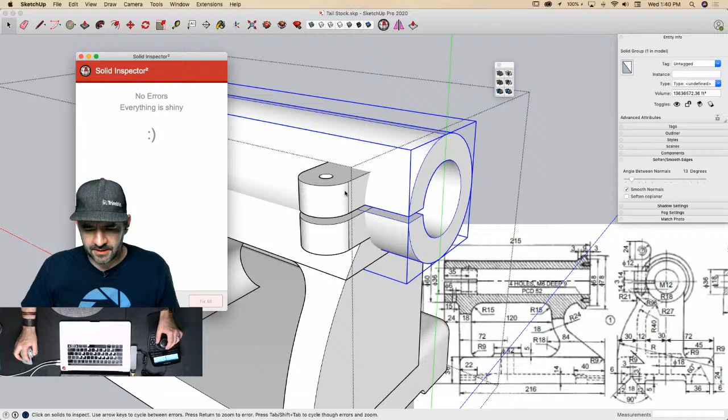Even though I cut this, again, simple extrusion with stray edges. Who would have known? All right, I'm just going to grab all 3 of these and outer shell them. Nope, that didn't work, wrong button. Let me shell 2 of them, and then a 3rd. That's weird, I hit that a lot with outer shell, it's all about the order you do things.

All right, let's get this pushed.

CA Ward said they don't think this lathe probably lasted long in the market because of all the recalls. I think that's fair. That's gonna work, it's gonna work. Throwing shade on these guys, I like to do that. Yeah, it's them, it's their fault, them. All right, so air quotes them.

Yeah, these guys. All right, so I'm going to get crafty here. Like a Beastie Boy? Oh wait, no, that's a her, she's crafty.

No, because what I want to do is keep the portion of this model that's on the outside, but get rid of everything that's above it. So the easiest way I could think to do that is to explode this out, so I have 1, 2, 3, 4 pieces right now. I'll take this piece, use it as a cutter to trim this piece. Now if I go into this piece, I have separate pieces like that. I can triple click and delete the inside piece, triple click, delete that piece. That's giving me just that chunk right there.

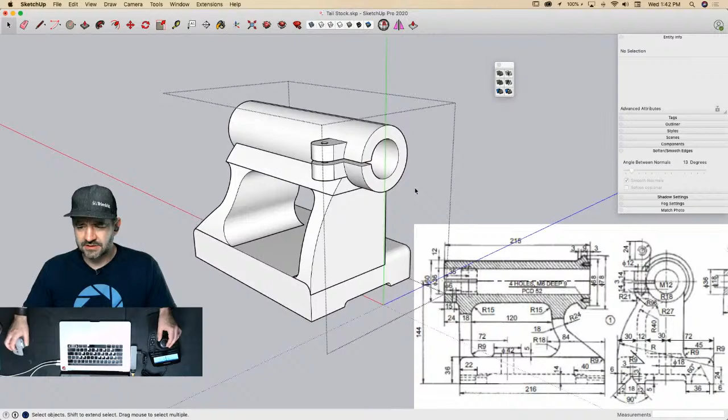So I'm getting to the point where I'll have a unified body I can work with. I know this isn't perfect, there's some details on here I just don't understand that are called out, but I'm getting towards something. So I'm thinking what I'll do now is check for solid, apparently.

Oh, this is going to be an issue, check this out. Oh man, I love issues. Because this came down to zero - the way both Solid Inspector and SketchUp's native solid algorithm work is by making sure every line is only connected to 2 faces. So if I have a face here, they connect at a line, that's a solid corner. What's happening right here is I actually have 4 faces, 1, 2, 3, 4, meeting at one line, so everything thinks it's not solid.

So what I have to do is make it look like a solid so I can use solid tools on it. I'm going to draw a single line across here, kind of bridging the gap, and push-pull that all the way to the other side. So what that gives me is now I don't have multiple pieces coming together at one spot. So if I check it now, it should find it as a solid.

Even though that laps over onto this, not a big deal because I'm using union now to combine the 2 pieces together. And I can work my way down and union that, and then - oh, looks like our base is not solid. Oh, because it didn't make it a group.

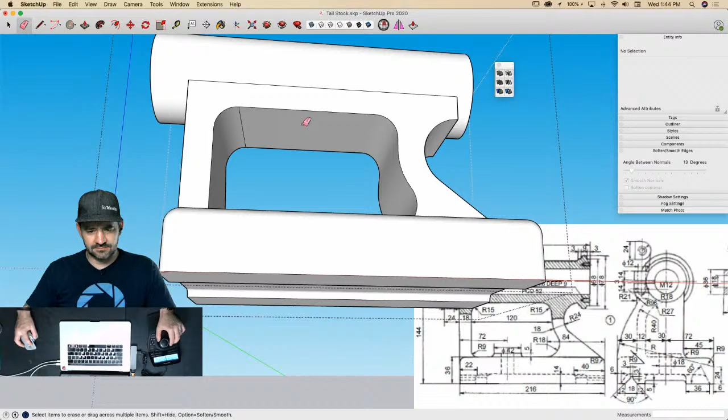Ooh, what's going on here? Uh-oh, that's not going to work. Oh, shouldn't have zoomed in there. Yeah, don't mind that.

That got weird. I'm not going to say that Andy's the boss of you, but he suggested that you save. Yeah, Andy's got a point, that would be a good thing to do.

All right, I'm just creating a quick face right here. Just going to grab all this. Oops, why do I have so many groups in groups? All right, there we go. I'm going to grab all that, grab more, there we go. Intersect face with selection, and now I can trim the rest of that off. There we go, now I don't have that chunk sticking out there.

I think you're completely right doing these little trimmy bits. It's the whole reason God invented hand planes in woodworking. Yeah, basically I'm using a random orbital to clean it up a little bit, fixing the sanding. That's right. See how it turned out down here. Oh, beauty.

That's our first piece. I guess I didn't do all the details on the bottom because I still don't really understand what's going on there either. That archy thing, is that just for screws? You think like that 90-degree thing here? Yeah, that thing. Well, looks like assuming it's just this whole thing sits on a rail system of some sort, right? Oh yeah, that goes the whole length of it. So that's probably to keep it aligned. I didn't draw it, but there's a hole here which I'm assuming is like a big bolt up into the rail to lock it down. Yeah, I should probably put that in there. It seems important.

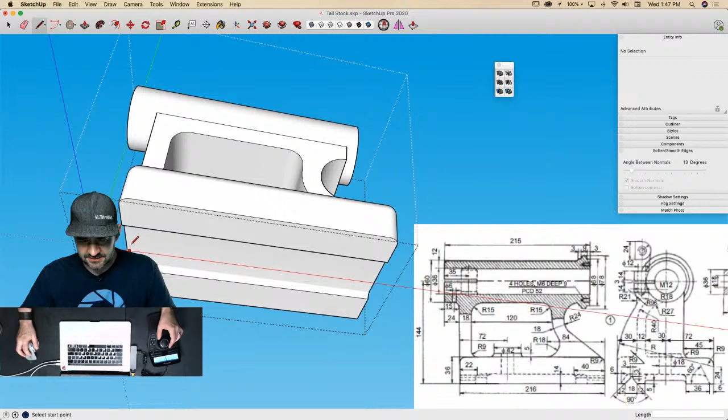Yeah, I'll do that. All right, so that piece aligns with the center, which actually, as semi kind of meant for it to happen, is that aligned right at the axes of the piece. So right here, if I bring this back 72, that's where the center of this hole is. So I'll start by putting my standard, the center hole is 18. I'll just draw this as 9, get rid of these lines I used for reference, and then pull that up in here. Now it looks like it just has a reinforcement around it, so I'll draw another circle of 21. And it looks like that comes up 5. And there's that piece. So, okay, that's something.

That was who picked that out? Man, gotta talk to somebody about that. Yeah, need to think, McFly.

By the way, did you know that the whole trilogy's on Netflix right now? I saw that, we watched it. It's funny, I started up on Saturday. My wife kept walking through, pausing, and ending up watching, sticking around for 15-minute chunks, trying to leave and come back. You can't escape it, she couldn't stay gone. No chance.

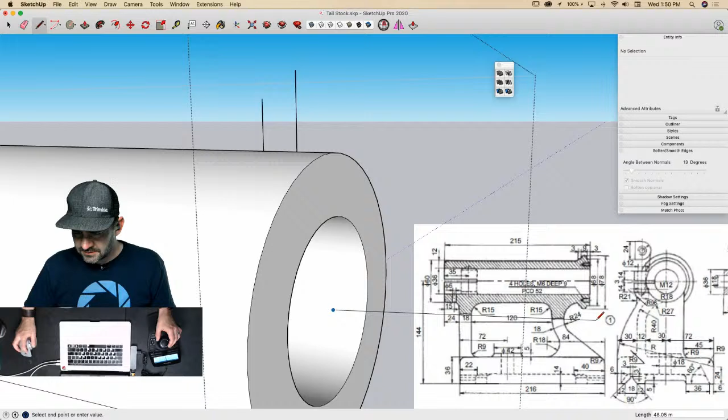But now I gotta find out how high to go with them. So I'm gonna come down here to the center, and this one is 68 halves. That's the low piece. And then we have 78 halves for the high piece. All right, so there we go, that's what I'm working in right there. So if I come this way 3, and I come this way 3, that is just the rough dimensions.

It does look like everything is maybe rounded out though, so we could do that. I can come in here and say, do an arc from here to here, do an arc from here to here, that same arc right here, and then maybe another one. No, it looks like it's probably just like this. There we go — whoops, whoops. I don't know, I'm not sure if I'm seeing a rounded edge or if that's just the crosshatch. Yeah, there's a lot of things that I don't know what I'm seeing. That seems to kind of be the standard for this particular drawing.

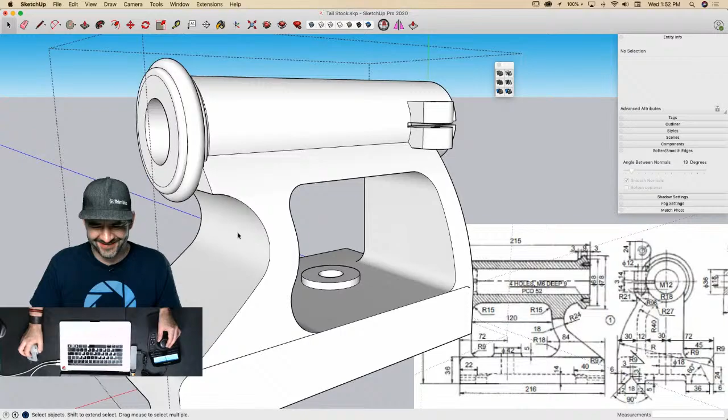All right, but that's easy enough to take that now. Follow me with this. That's nice. I'm 100% not confident with the way this whole thing went down, but we're working with what we got. Now, as we start to merge into that stuff, that's what starts to get a little weird. I'm wondering if I can — no, it's going to get too messy. I kind of feel like I could chop it off with a plane of some sort. So if I was to... I'm going to come out of context. I don't know, I'm winging stuff at this point. Bring that up to here.

Oops, back down to here. There we go. So that plane would chop everything off so it disappeared into this space.

So I'm going to go ahead and cut it. I'm going to come into context, edit, paste in place. It'll drop that reference plane I just created, then grab all, well, I'll grab that. That's what I'll really need to intersect face with context. Then I should be able to delete that.

All right, it's not pretty. You know what I could do? Ooh. Hold on.

41 minutes to launch. Ah, yeah, I know.

All right, what I could do is I could take it back to the bottom here. Let's get around here. See, this is what I was saying before, is I try not to do too much of this kind of stuff because a lot of people have a hard time seeing what I'm trying to do. So I don't generally... Dave's comment was he just has hide rest of model on when he was doing it, any of his model in place stuff.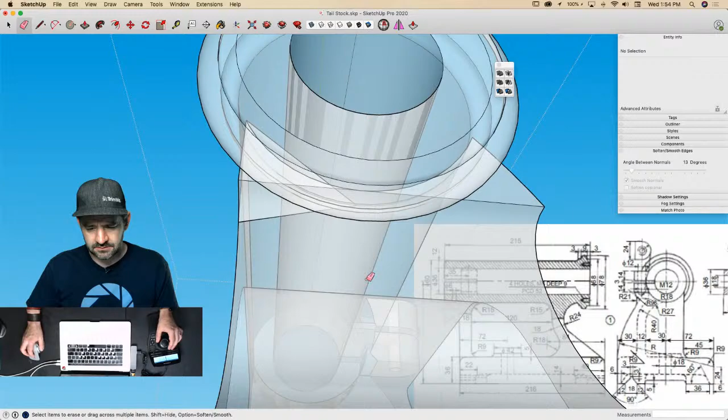That works. All right, so if I get rid of that, and then I'll need to do the other side too, though.

Hold up. I have a vision. There we go, from there down to here. And then from here.

My vision's not working. Undo, undo. All right, it's gonna sit like that. That's what's gonna happen. Now I was thinking it'd be kind of cool to cut it off and loft it back, but I guess it depends if we want to just spend another 20 minutes just on this piece. I don't know that I do.

Good news, there's no knurling involved in this piece. That is true.

Oh heck, I'm gonna do it. I'm gonna get messy. All right. I am going to take this piece straight up to here. I'm gonna come across that same line. So I'm gonna trace that line so I see where it is.

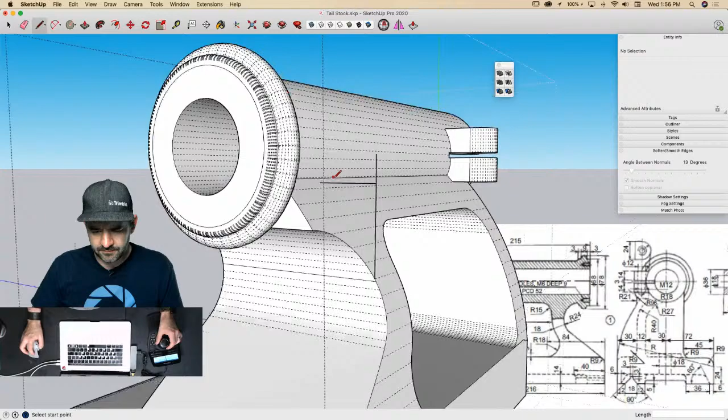And then that piece. Let's take this guy straight across. Bring that up. There we go. To create a cutting plane, I'm just going to take that down to there.

Oops, I took that off the wrong spot. Okie doke. There we go. Awesome. So now, just say, grab these two, intersect faces with selection. That should break it. And now I can get rid of that, get rid of that, get rid of that. Yes, yes, that is what I was looking for.

Sweet. All right. This is gonna be fun. This is gonna be something. Really something. All right, get rid of all these extra lines, and we're just gonna loft this thing up. So who knows what it'll actually look like when we're done. Probably will never go to production. Well, odds are good on that one.

Okay. All right, there we go. So now what I want to do is save. And I grab that. That's broken. Is this broken too?

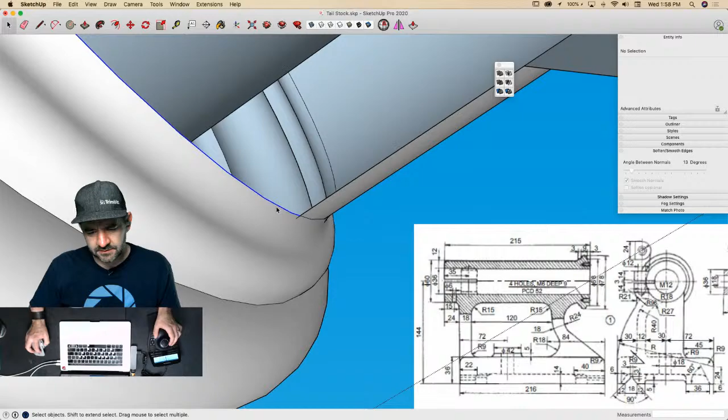So I'm just gonna grab that, weld it, now it's one piece. Did I get that all the way to the end? I did. Okay, and unfortunately, I'm gonna have to do the same thing right here. Grab one piece, 2, 3, 4, 5, 6. I'm just showing off that I do know how to count. Awesome. Weld that. Now I can grab this piece, this piece, this piece, this piece, this piece, and this piece. Sorry, that was bothering me, so I just had to start all over.

All right, there. Now I can grab these pieces, and I give CurveLoft a shot at just welding or lofting that whole thing together.

That's neat looking. That's unique. It is a unique solution. It is something. And it would work. Just let's be honest, this would work.

Let's not do that. Let's do this instead. Let's break this into 2 lofts. Let's loft this half. And then loft the other half. That's better. I think this was the issue that was bringing this section over here in on the thing. All right.

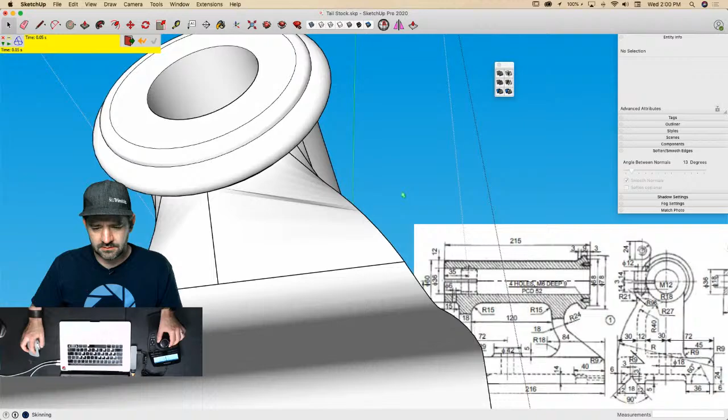Okay, so that is far more buildable than what we had before. I could have actually, rather than a straight line, probably should have put a curve right there. Let's do that real quick. Nope, hold on, undo.

You do know you've got several more pieces on this particular drawing. Well, I'm feeling like if I get this body done, I'm gonna feel pretty good about things. So kind of going with that right now. Okay, so that's fine, you basically drew a line in the sand, and that line is this body. That's right, I'll make this body beautiful. Well, I want to make it marginally acceptable.

That's better. Oh yes, that's better. In fact, I might even go round some corners off because we have some spots that are supposed to be round that aren't right now, so I might do that too.

Let's go to... I guess if you get around to it. Nailed it, it's like you're not even trying anymore. They just happen. I feel like I'm not even having to do any of the work, you're just setting me up. You're welcome. Thanks, you're all welcome. I don't know if anybody else appreciates it.

Oh, that looks yucky. Wow, that gets crazy. Kind of don't love the direction that it chose to loft that in.

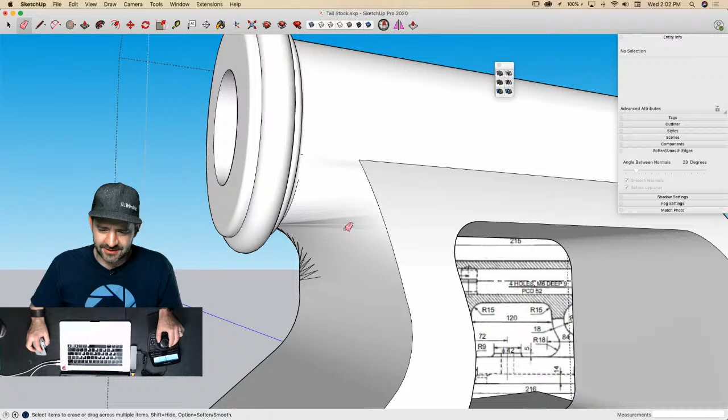There we go, I hate when it does that weird stitchy shading thing. Yeah, and this is another one of those things where I know I need to spend more time with Curveloft because I know it does some amazing things, but I'm still not solid with it. I still feel like a hack.

Yeah, all right, that looks good. So now it definitely has that sewing machine aesthetic, but it looks pretty good. I'm happy with that.

So I am curious if I could take all of that, if I just tell Round Corner to go at it with that, what's going to happen? I don't know, probably not. It's kind of exciting. Probably too large.

Offset is probably too large. Wait a minute. What's my... that's 5 millimeters right there. Okay, so probably need to go...

Yeah, we're kind of off the rails. Yeah, beaten path. Yeah. Nah, I'm not, I'm going to say, yeah well, stop. Just stop. All right, so there I go.

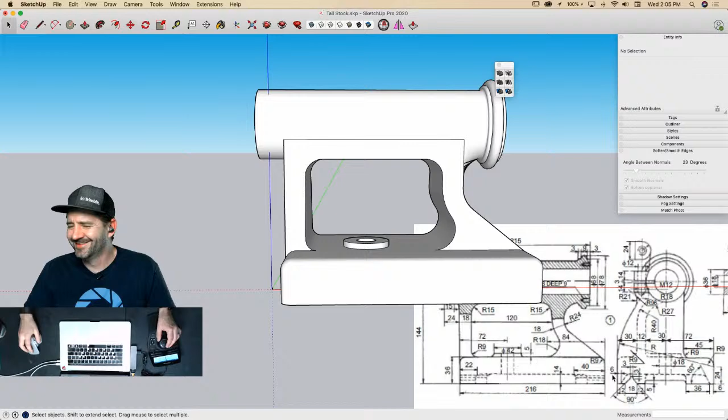Yeah, I really wanted that to be... I really wanted those drawings to be better. I thought that would be a really cool thing to put together, but you know, it wasn't. We just hope for the best, and it's good. It was good. You set your sights on something, and maybe your sights were a little too high. I don't know, I think that looked like a pretty good problem. Yeah, that turned out all right at the end of the day, all right.

It's okay, but even I'm looking at the rest of the drawing, the rest of the dimensions on this drawing, and I feel like there's still stuff missing. Look, there's like on the right side, there's a little 12 units wide thing there. Kind of goes up and curves. Where's that happening? That's not happening anywhere, right?

I think that's... does that go in here? Is that like in the chunk? I don't know, it's beneath it. It's happening, or is that down here? Yeah, I don't know, I don't get to see where it's happening now.

And even the grooves in the bottom, it's really hard for me to tell from this drawing where those are. I mean, I know it's got something right here, but that goes through nothing on this side?

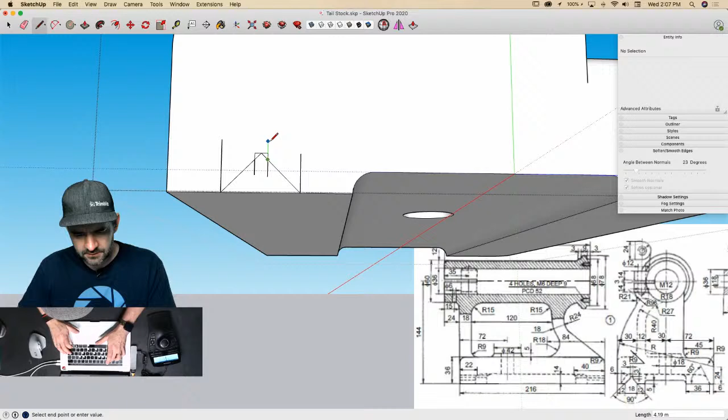Option rotate 45, grab this one, option rotate 45, and then I've got a little, this way 1.5, this way 1.5, and that whole thing goes up 3. There we go, with the dimensions I got, that's what I'm getting for that groove.

But then I have this whole thing, which I don't... is that just carved out just to keep it lighter? I guess so. See, look, it looks like... man, I can't even tell the dimensions on this thing. Okay, so yes I can, hold up.

So what I have here, this line, I come over 6, and I come over 6. That's one edge of a rectangle. The other one, if I go full way across like this, is 40 in this way. And then 22 in this way.

So that's the initial rectangle, like that. Get rid of this, all of this. And now that goes up 14.

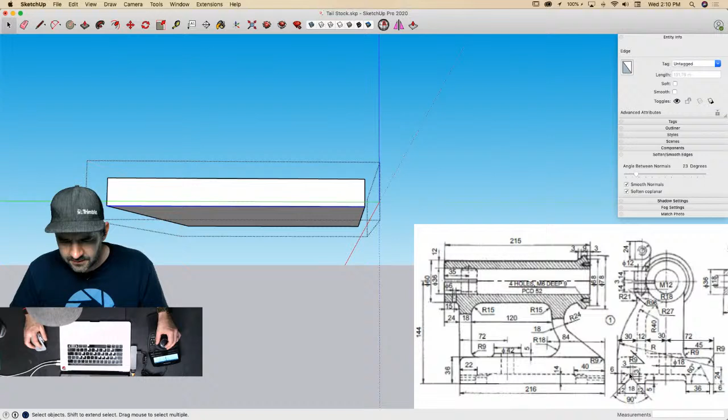Okay, so I'm going to grab that bottom line. I'm going to option copy that to 60. Same thing over here. All right, and then we'll push that through.

I think the round corner can handle this. If I grab all of that, I should be able to go to, sorry, Fredo corner. I keep saying round corner. Fredo corner, please. It's good to remember your manners.

Hold up, I don't want the surfaces. I just want those edges because I don't want to round these pieces. I want those to be flat. Now I can go Fredo corner, round, and bump that up to like, I don't know.

Let's see what 5 looks like. Couldn't actually find a dimension anywhere where they had it, even that looks big though. Let's go with like 3.

Now that piece I can use just as a cutter. I don't know why do I keep closing my solid tools? All I do is turn it off and turn it back on. So take that now, need a shortcut for that.

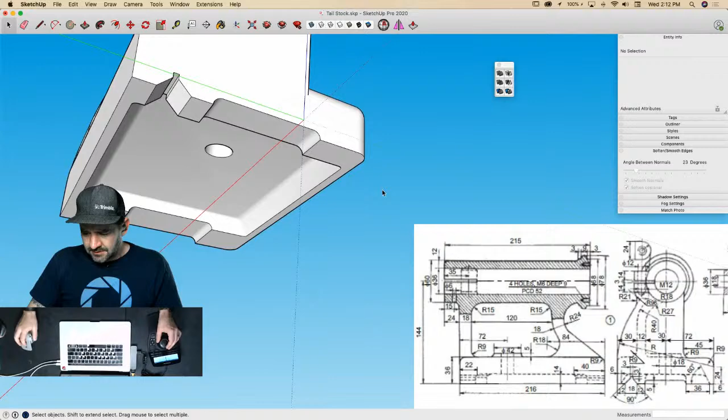I guess that's a big chunk of steel to take out of the bottom, but now I kind of feel like, no, that's good. I don't know. Something like that maybe, could be. I don't know, I have the drawings and I can't tell.

I'm sure there's somebody that drew that originally that's just like, what? It's perfectly obvious, it's right here. Duh, can't you see the dotted lines over the dotted lines over the dotted lines?

Yep, just pick some dotted lines. But see, this goes with it, makes sense I guess, because here's one set of dotted lines, which is this groove. These dotted lines die in here, which I think are these. Same thing on this side, they come out, those die in there. And from this direction, I got this thing, which goes over the top of both, and I have this here. Yeah, I think it works.

Right, just one side. All right, yeah, that's good, that's it. That's where I'm gonna stop.

It's time to go watch some SpaceX or something. All right, if the weather lets it. Yeah, is it yucky out there? Yucky? Who has kids? I guess it's being cloudy and threatening. Well, let's see, that's a thing that's happened before, right? The entire nation has gotten all together to watch a launch be aborted. Yes, yes, all right, cool.

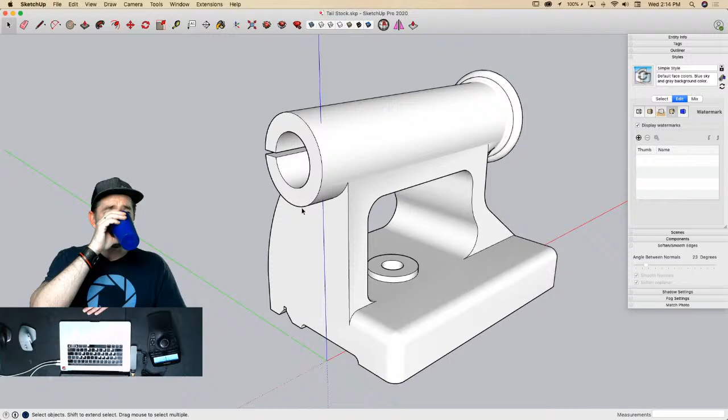It's funny, periodically I'll end up watching these YouTube videos of guys restoring old tools, like old drill presses or bandsaws or whatever. Those things are all these big cast iron, curvy sided things where the curves, while not necessarily functional, still make for a really pretty piece of hardware. Then you look at a new modern day equivalent bandsaw, and it's all just square edges and straight sides. While this seems completely frivolous, there's just something about it that's compelling, and way less boring than straight sides. Well, and I have a feeling there's a lot to that.

This was probably cast from iron, so it probably weighs quite a bit. They only had to make it once, so why not make it kind of fun and curvy? Whereas nowadays you get aluminum pieces that probably weigh a third as much, and ship for cheaper, built for cheaper.

Even just looking at this, and I know it's not even real, I can run my fingers over it in my brain and feel the imperfections in the casting and the bumpiness. It's definitely cool stuff.

But they should have detailed it with better machine drawings than that, that's all I'm saying. I think they probably made the technical drawings after. Some dude with a lot of the curvier bits was probably making it out of wood and just decided to make it a little curvy here, then handed the final piece to some guy who's like, what the hell is this? What are these curves?

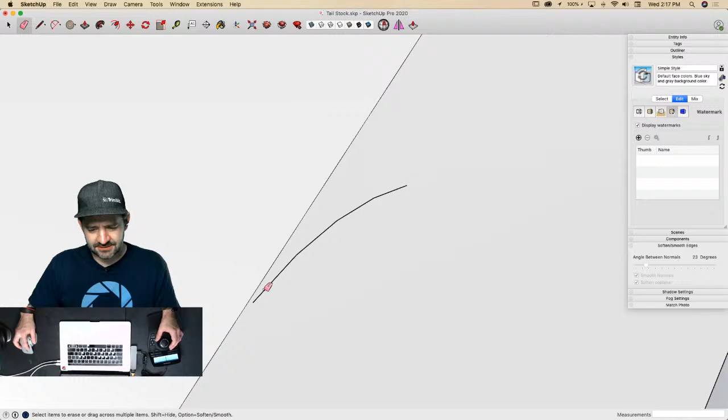Cool, that's better, that was irritating me. I was intentionally holding it in this direction, not wanting to come over here and see that, but now that I got rid of it I can show the whole thing. I've just been avoiding this angle. I sound like the guy that created the technical drawing we were just building from — if you look at it from over here, it's pretty obvious how this thing works.

That is the housing body for a tailstock — I already forgot what this thing's called, tailstock, there we go, it's right there in the title at the top of the screen. Well, that turned out okay by the end. That was a challenge — I've seen better drawings than that.

Dave posted his model — he's got a beautiful model of a lathe that looks really good. Where did you get your information from, Dave? Was yours made up just by looking at stuff, or did you pull dimensions off of anything in particular? Because his looks very nice, it's worth a trip over to the forum if you haven't seen it. He needs to now go render it in his preferred style. Look at all the curvy bits on that, the whole thing.